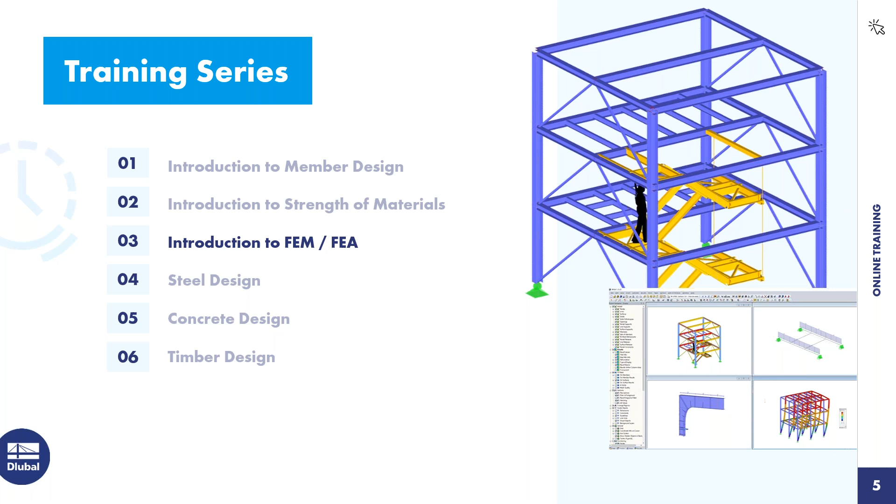So what can you expect from today's training? First of all, we will give you an introduction to the basic principle of the finite element analysis. Then we will model together a kind of continuous slab; it will be our introductory example of today. Then we will give you an introduction to the plate theory, the basic different concepts between two plate theories, Kirchhoff and Reissner-Mindlin. Furthermore, we show you how to perform nonlinear calculations with RFEM 6, and then the final step will be some input of singularities, which we do also together.

So let's skip to the PowerPoint. First of all, we see here the basics of FEA. In general, computer programs are based on the displacement method, so the unknown values are deformation or displacements. It's the opposite of the force method, and both calculation and analysis methods you learn in general in your studies, college, and courses.

In the force method, the force is the unknown value, and you try to get the value of the forces. In this case, we have the displacement method, so the unknown values are the displacements and deformations. Based on these, the computer programs calculate these deformations and displacement vectors first, and then they can get to the results of internal forces and support reactions, for example.

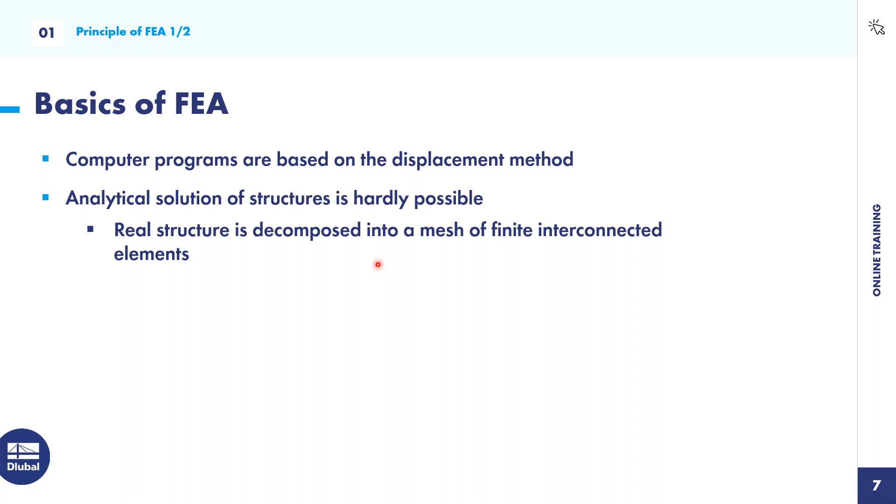So what will be done in this whole finite element analysis? The real structure is decomposed into a mesh of finite interconnected elements, and these elements, this is the finite element analysis. So we take the real structure and decompose it into a mesh of finite elements.

Then at each element, the properties are described at the nodes, so also with the degrees of freedom, and the mechanical behavior is described by different approximation sets. This is different for each software developer, and the whole process of decomposition of structures into finite elements is called discretization. This is one technical term you have to remember when dealing with finite element analysis.

Okay, so the next thing is the procedure of an FEA calculation. At first, we mesh the structure and determine the local element stiffness relation. So at each FE node, we get the local element stiffness, and then we have to transform it to the global coordinate system.

Furthermore, we have also a composition of the element stiffness relations, and through the transformation to the global coordinate system, we assemble the entire structure. Then we have the composition of the total stiffness relation, and now we have to add some boundary conditions, such as loads and supports.

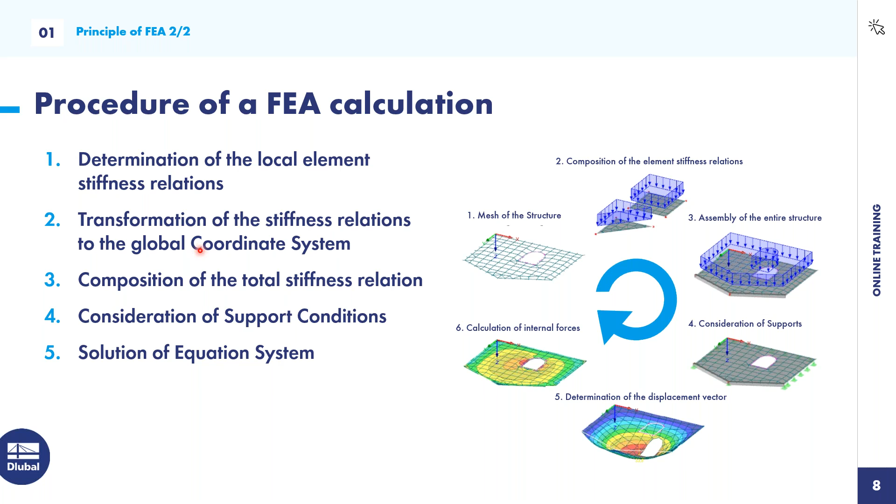So we have to consider these support conditions, and then we solve the whole equation system, and the first thing we get is the displacement vector. Based on the displacement vector, we can also calculate the internal forces and support forces. Yeah, and this is the basic principle of the FEA calculation.

You don't need to know more because I'm not a teacher or professor who teaches courses about FEM. In my opinion, this is enough to know how programs like RFEM 6 work in general.

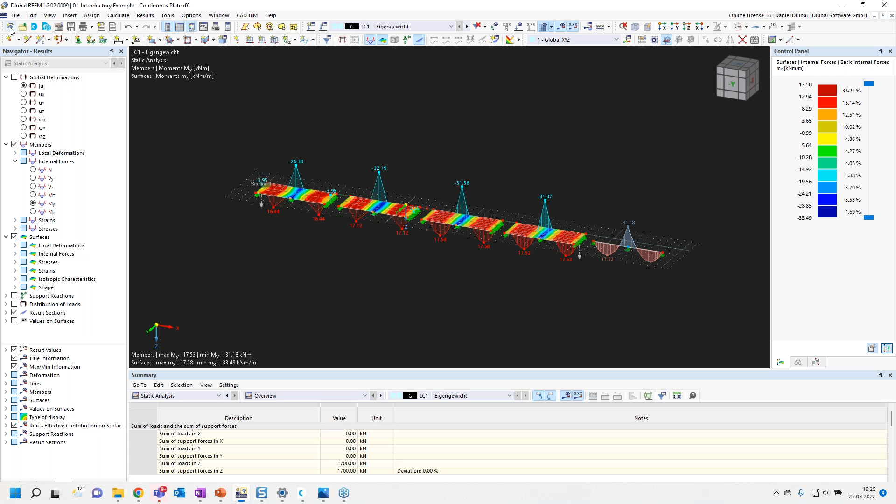Okay, so a new window is appearing. I will close this. A new window is appearing, and we enter here the name continuous plate, and I choose here the type of model 2D XY plate. And this is everything. You can save it also under project, but in this case I don't need it, so this is absolutely fine.

Important is that we choose here the type of model 2D XY plate, because we want to consider bending moments into 2 different rotations and also 1 vertical deformation. So I click on OK.

We already had one training about the introduction of member design, where I showed you a lot of the user interface of RFEM 6. This is something I won't do today, but I'll give you a rough overview about RFEM 6.

Here you find the menu bar at the top. An important thing is that you can also change your background. Go to display properties, and at the bottom you find default settings. I prefer the white background, I'm a big fan of it, so I click OK, click OK again, and then I see it like here.

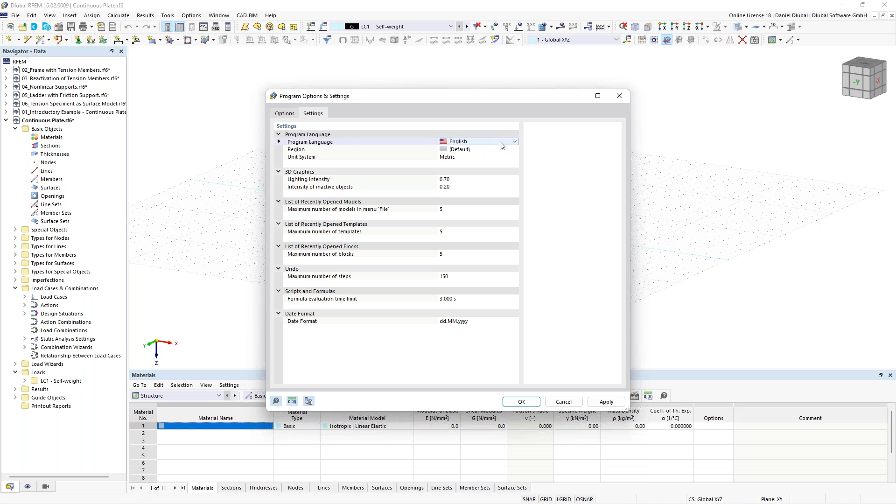Because it's a kind of international training today, I will also show you how to change the language. Go to the menu bar, options, click on program options, and in the tab settings you can change the program language into different languages. Then you have to restart the program and the language settings will be applied.

Okay, good, let's model together. At first I will create the surface. I click on new rectangular surface, and now I have to create a thickness with a material.

So what is a thickness? A thickness of a slab or wall is pretty clear - every surface has a thickness, and you can compare it with the cross-section of a member. Last time we created new members, and the members had information about the material, and this material was assigned to a cross-section. This cross-section is an adequate example for the thickness.

So we create a new thickness, and this thickness will be 300 millimeters thick. We will also create a new material, so I open the material library.

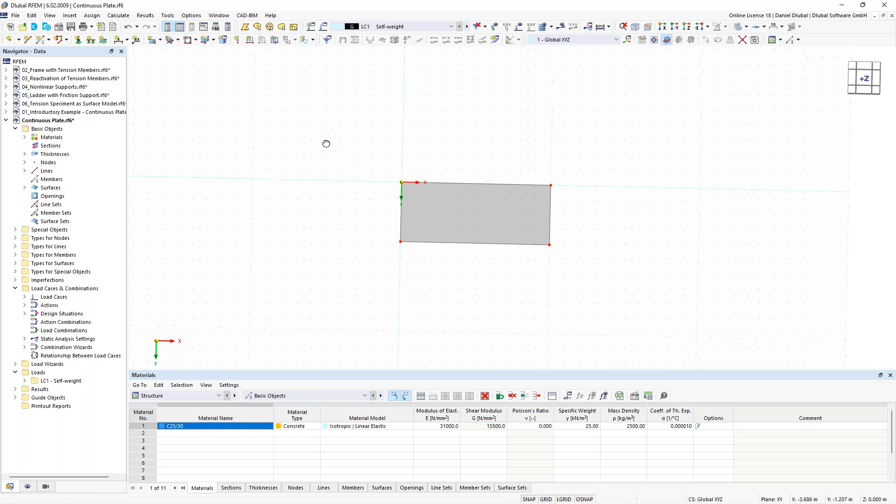Now I start from the global 0 point, click on this grid point, and go 10 meters in the global X direction and 4 meters to the bottom. This is the end coordinate. I click OK, and a right click or escape will end this command.

So the next part is the creation of an additional line here in the middle, because we want to consider a continuous beam or continuous plate. In order to assign some line supports, I have to add an additional line. We can do this very easily.

Just go to the symbol bar, click on new line, and choose the middle point of this line and connect these to one. In this case, I have here blue nodes.

What does it mean, these blue nodes? These blue nodes have the type 'on line', so they are part of this line. When I double click on this outer line, number 2, I also see which nodes are on this line, and now I also see node number 5. So everything in RFEM 6 is pretty clear, connected with a logical behavior.

When I want to assign an object additional information, you see it also here in the data navigator.

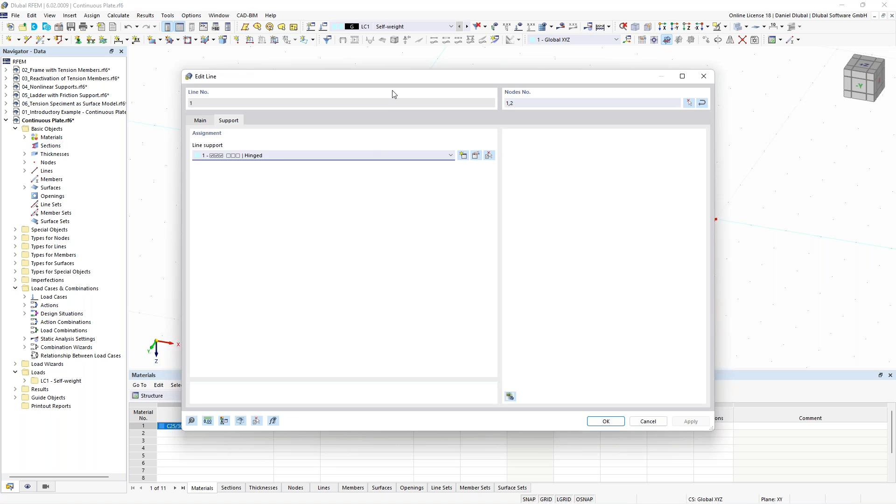You see that the line can have additional information, and when I click on the line support, you also see to which... sorry, this was the wrong one.

And here you can see, when I take a closer look to this line, which line this line support is assigned to. This makes it pretty easy because RFEM 6 has a clear structure of all the objects which can be connected to each other.

So the other one we'll do a little bit different. I draw a selection window in order to select both of these lines. Then I click on Assign Line Support, and RFEM 6 remembers my selection, and I create now a new line support.

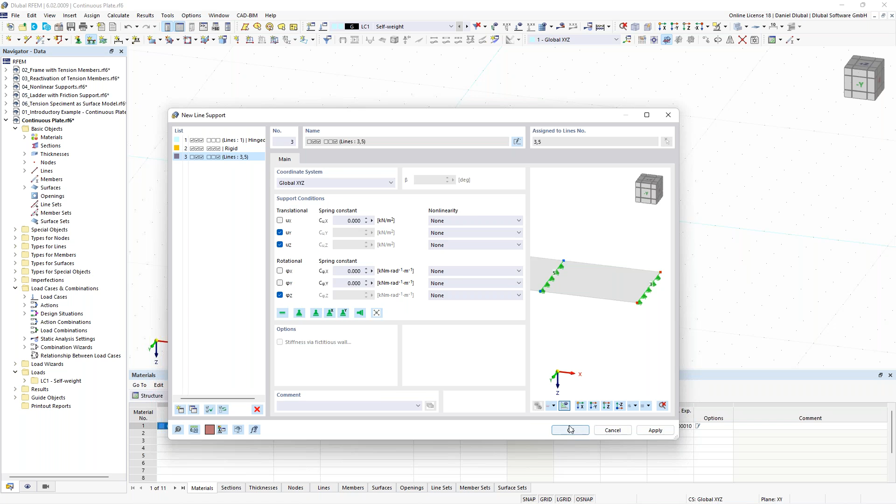In this case I only want to consider vertical forces, so it can be free in the global X direction. So I activate this sliding in X, or a roller support in X direction, and that was everything. I click on OK, and I see it like that.

So now I want to consider a surface load. In this case, we have to assign the loads to a load case.

The load case can be found here in the symbol bar. I click here on this button, and I don't want to consider the self-weight for this case, so I deactivate it and click on OK again.

The next thing is the creation of the surface load. So I go here to the symbol bar again and click on new surface load. As a load we have here 10 kilonewton per square meter, and I assign it to that surface. I click on OK and OK again.

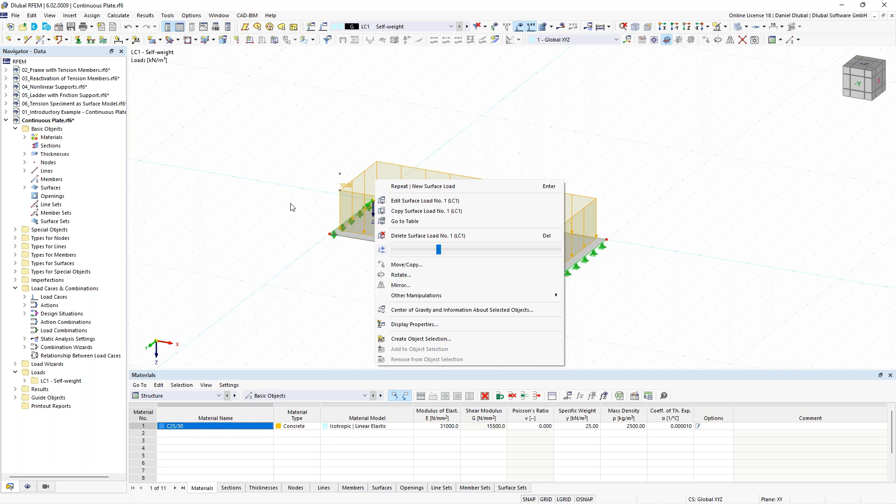By right-clicking on the surface, I can also adjust the display, so the display height of this surface load. And now it becomes interesting because we want to add different FE mesh refinements.

So in general, the whole FE mesh size is set here in the menu bar by clicking on Calculate and Mesh Settings. Here we see a target length of the finite elements. If I don't do any further FE mesh refinements, RFEM 6 will generate the FE mesh by this length.

But in this case, we want to do our own refinements. For a better overview, I deactivate the display of the loads and I go to the data navigator, and go here to types for members. Sorry, not members, types for surfaces.

And here I have the option to create mesh refinements for surfaces. Right click on that and click here on new surface mesh refinement. Now a new dialog opens and I can create different kinds of mesh refinements because I have here this list, and then I can assign it to different surfaces.

So I copy this one 3 times, and the first mesh refinement will be 2 meters, the second one 1.6, the third one 0.5, and the last one 0.1. Okay, I click on OK.

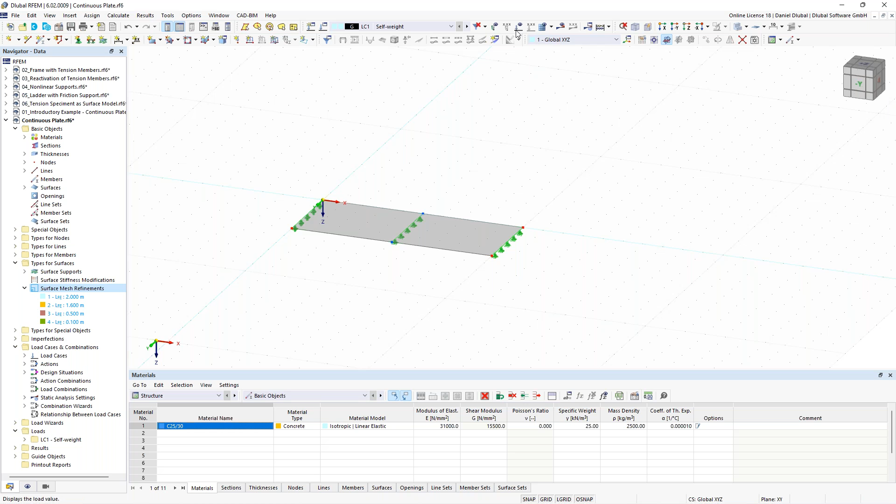So I activate here the load again, and now I copy the whole structure in order to make 3 more surfaces. So I select the whole structure here. Now right click on the structure, and now I want to move and copy it.

I say create copy 3 times, and the displacement vector is from here to here. I can also insert here a number, but 11 meters is okay for me. I say OK, and the surfaces were copied.

I move them a little bit so that we have more place here. So I move them in order to have more place here.

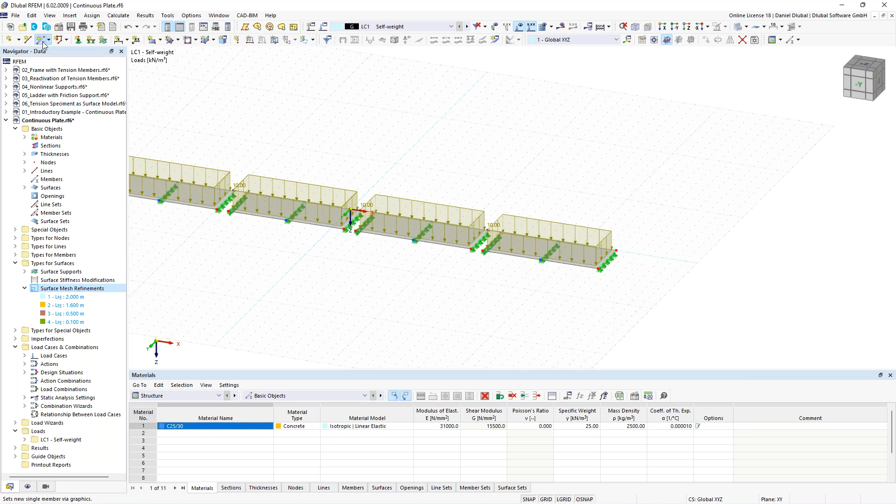Now I will add as a reference example also the beam element. So I click here on new single member in the symbol bar. And again, here we have the member type beam, and we have to assign them a section.

So I create a new section. In this case, a rectangular, massive rectangle section. I go here to the parametric massive, and the geometry is here - the width is 1000 millimeters and the height 300 millimeters.

So if someone doesn't see this rectangular massive profile, you can also import different sections from the cross-section library. Just click here on massive rectangle and then you have the same thing. Okay, I click on OK.

And the material of the section is the same one as for the surface. This is important. Okay, this was everything.

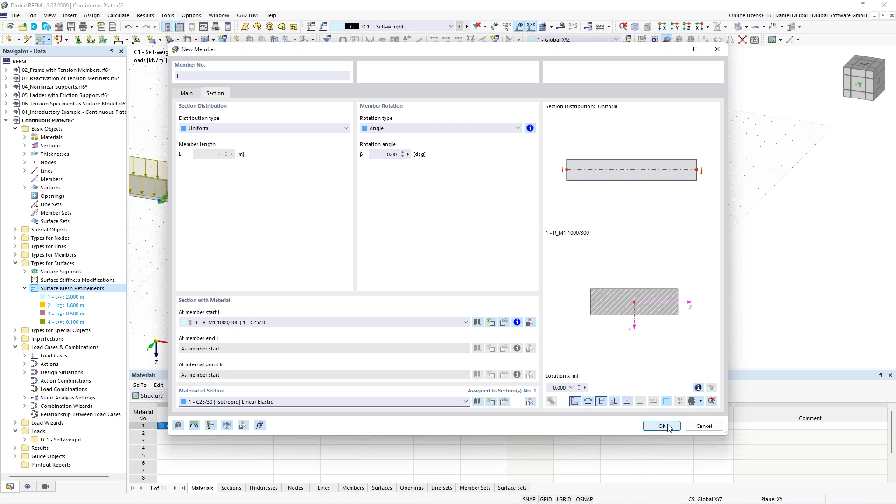Now I create also the beam from there to there. Now I don't see my grid points. No, this doesn't matter. I can also enter here in the left dialog the member length to 10 meters. I click on OK and I see it like here.

So in order to adjust the work plane, I recommend clicking with the right click to work plane grid and then say okay, I want to change the grid points dynamically according to the size of the model. I activate this, I click on OK, and now you see it like that.

Okay, perfect. So the next point is the assigning of these different mesh refinements to the surfaces. So I disable the view of the loads. And now this is one of the huge advantages of RFEM 6.

I go here to the mesh refinements. I click here on edit. And now I can assign these items in the list to the surfaces, and I can remain in this window. So I click on this first one, choose this one, click OK, say apply, and then I jump to the other one and do this for the second one and also for the other ones.

So last one, I click on OK. Yeah, okay. The next thing is that we generate the FE mesh.

So in order to generate the FE mesh, we can click here in the symbol bar, generate mesh or display mesh, doesn't matter. When the mesh wasn't generated, clicking display mesh generates it automatically. So I click here on generate mesh.

And in order to see the mesh a little bit better, I click here in the symbol bar to the wireframe model, the display model. And now let's take a look at the FE mesh. Yeah, this is the FE mesh, and at each FE node there will be results. Between these FE nodes, the results will be interpolated in order to get a smoother result distribution.

As you can see here, because we have a very rough FE mesh, this quality is not so good. So I will expect that these results will not be so good. So let's take a different look here. Okay, this is quite regular here, and this is very fine. So yeah, okay.

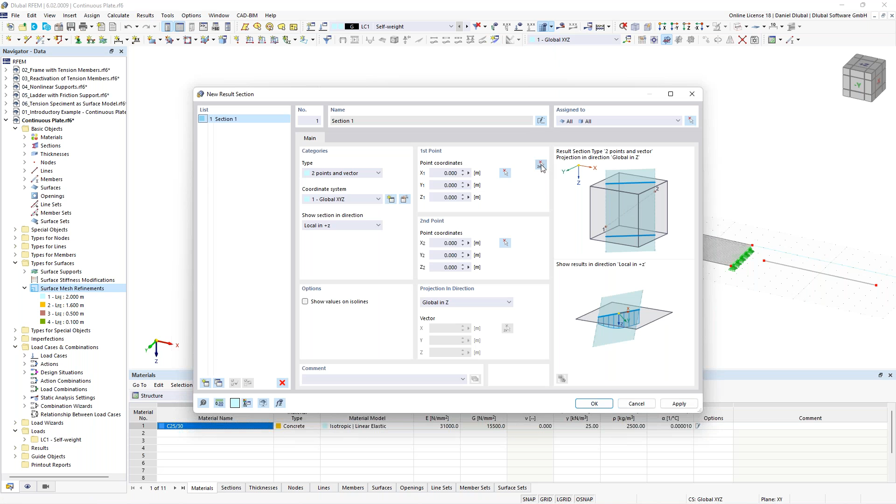In order to evaluate the results with a good overview, I will create a result section. Here in the symbol bar, I find the option to create a new result section. I click on that and I pick these two points where I want to have this section. In this case, this is from the left side to the right side. I click OK, and we see here this section.

Okay, yeah, and this was everything. Now let's calculate, and I'm very curious about the results.

Yeah, we got some errors, and this is because I forgot to assign some nodal supports here at the beam. No problem. I have to divide this beam into two parts because I want to have here a similar structural behavior as this surface.

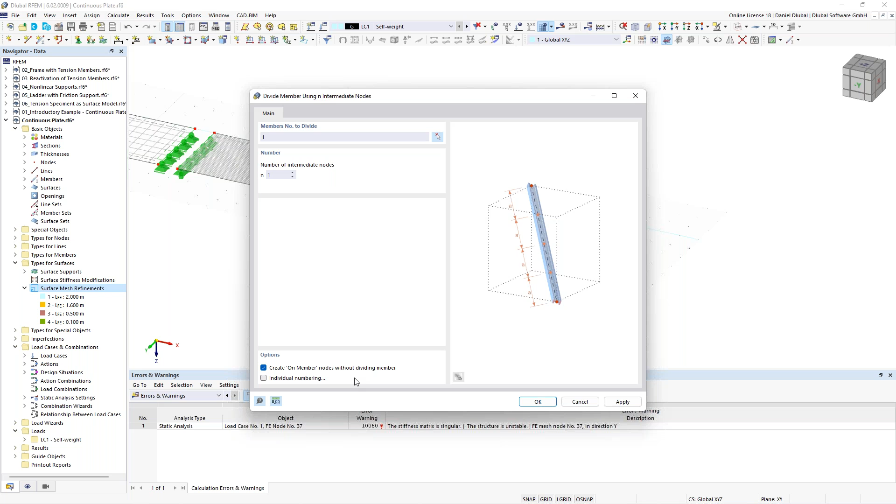So right click on the member and click here divide member, and choose intermediate nodes because I want to divide it in the middle. So I choose here 1, and now I create the option that the member shouldn't be completely divided, just creating this node. I click on OK. I say yes.

Now I have to add the line supports. The same thing we did with the assigning of the mesh refinements, we do also with the nodal support. So I go here, assign nodal support, and for my left node, I have to adjust my nodal support a little bit.

Because in order to also carry rotational moments, I have to consider the phi x rotation, and also that this member can't rotate around its own axis. I click on OK. I click on OK.

And now I assign it to this node. I click OK and then apply again. And now I choose here this roller in X and choose the other nodes and click on OK.

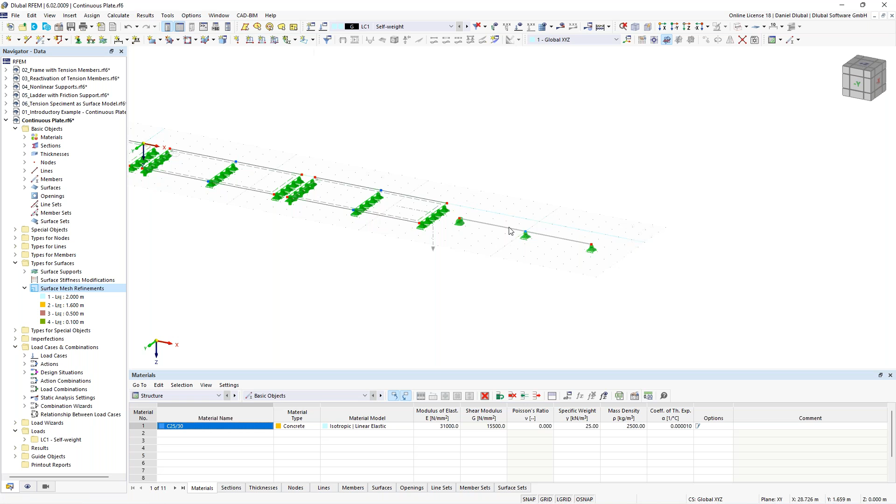Okay, now I have to apply the load. In this case, I have to apply a member load. We have also line loads. Where's the difference? Member loads are applied on real members like this one, and line loads, they can be applied on surfaces.

So this surface, for example, has boundary lines. When I want to apply line loads on the surface, I have to use line loads. And when I want to apply members like a steel hall with real steel cross sections, then I have to use member loads.

Okay, so I click here on member load, choose here a magnitude of 10 kilonewton per meter, click on OK, choose this one, OK again, and we have this load. Okay, now I try to calculate it again.

Now I hope it works. Okay, seems pretty good, and we get the result.

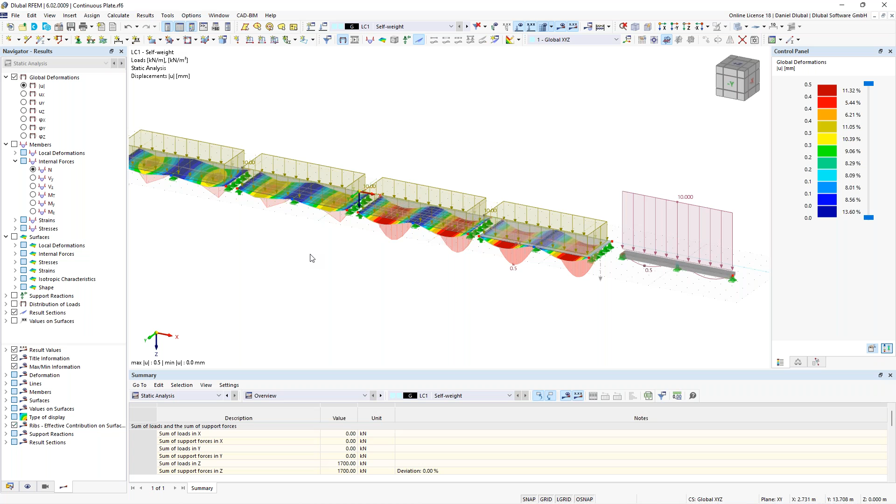So at first, we take a look at the global deformation. This is one of the first plausibility checks when you are performing FEA calculations, that you take a closer look to the deformations at first. So I deactivate the result section and take only a short look at the deformation. I see here, okay, yeah, it seems quite correct. Also here, this one seems quite okay. Maybe I change this one a little bit. And yeah, okay, so it seems correct.

Now it becomes very important. The next thing is the evaluation of internal forces. And therefore, I choose these two ones. I select them and create a visibility. And I disable the view of the loads because I want to show you something, and this is pretty important that you understand that.

So for members, in order to see results, you can activate internal forces by choosing them here in the result navigator. Now you see the internal forces, so the distribution of the bending moment. When I activate the local axis of this member, it means the moment goes around the local y-axis. Remember this for members or beams.

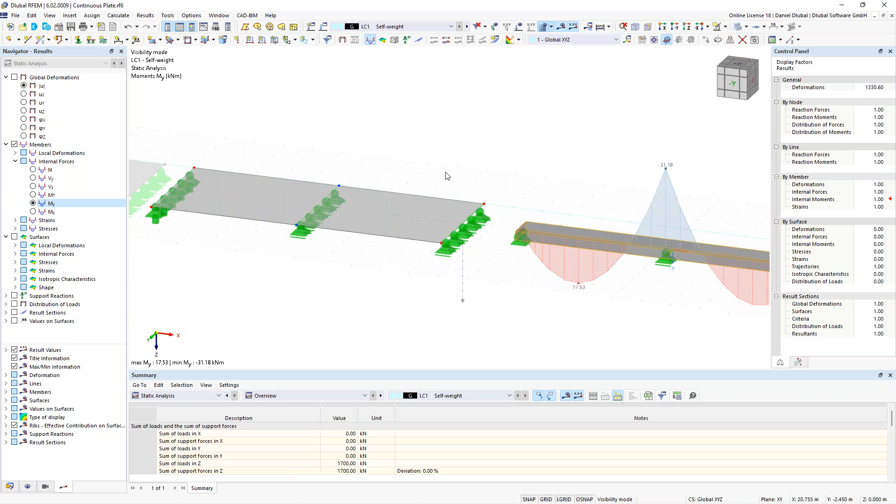So at surfaces, we have it a little bit different. I activate the surfaces, also here internal forces, mx. So mx is the same or comparable with the my of beams. When I activate the local axis of the surface, at surfaces the internal forces go along the axis. So mx means I get the internal forces, in this case the bending moment, along the x-axis, and not around the y-axis. So this is a huge difference.

So in order to see also the shear force distribution, I have to activate this one and here also this one. Then we have here the same distribution. Okay, so this is important to remember.

When I take a closer look at the internal forces of surfaces, I have to see mx as the my of beams, because mx is along the local x direction of the surface.

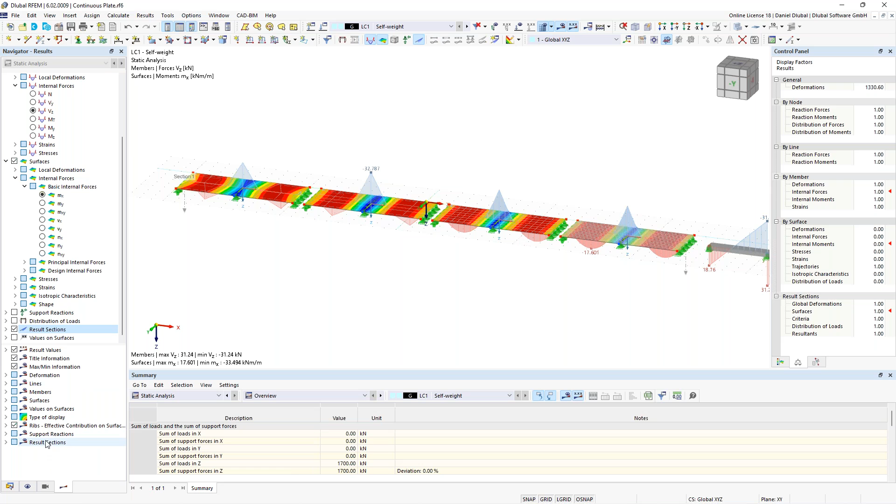Okay, now I change the hiding of the visibilities, and now we go through the examples. In order to have a similar distribution of the result section here on the right side, I activate the result sections. So the next thing is that I go to the bottom part of the result navigator and I activate local extremes of the result section.

So what can I see? First of all, let's take a closer look at the bending moment. So I choose this one. This beam should be our reference example. And these surfaces should have similar values like this beam here. So let's take a closer look.

So here we can see, okay, we have a support moment of minus 26 kilonewton meters, and here of minus 32, minus 31, minus 31. Okay, yeah, this seems pretty interesting because through the bad mesh refinement here, because we are very rough here, only 2 to 2 meters, we get very bad examples because only at these FE nodes the values are calculated, and the finer we get, the more we get to the same result like here at the beam element.

So also here at the field moments, 16, 17, and here we have 17.53. So this is also a difference. So in order to summarize it, it is important for FE calculations that you choose the FE mesh as fine as necessary and as rough as possible.

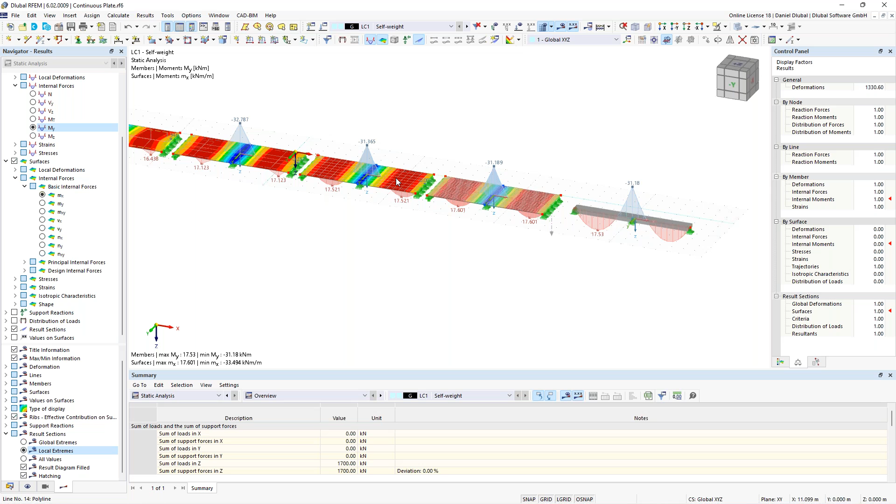For example, here you can see when I deactivate the results, that we have here more than 4 up to 6 FE elements between one span. So this leads to good values for results.

So my recommendation is between two boundary conditions, I would say you should have at least 3 up to 4 or 6 finite elements, because then it is enough and sufficient for your FE calculation. So again, choose your FE mesh refinement as fine as necessary and as rough as possible.

So now let's take a closer look at the results again. Here, right click on the section. I can open this and open a kind of result diagram.

And here I can see this in a better comparison. So here you can see I have here -26 on the left side. The next one is -32 and so on. This makes it quite interesting because the rough FE mesh is not good for this calculation.

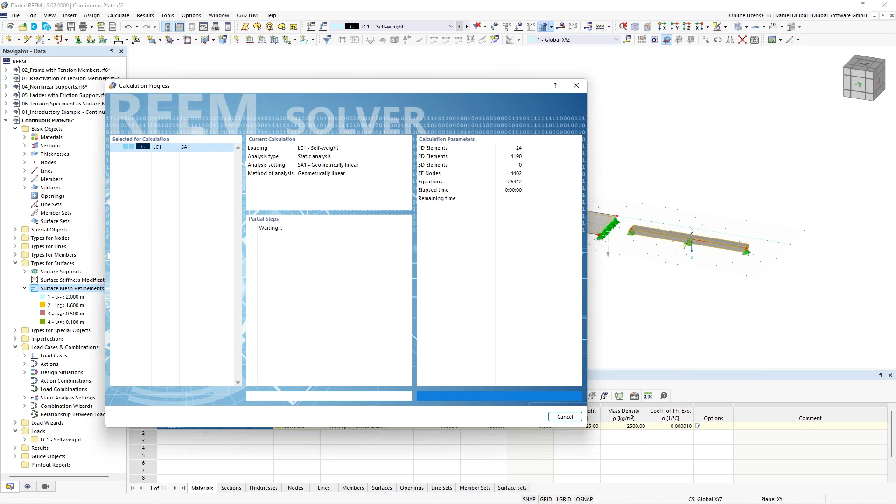And now you see how the support moment, for example, will change into that value. What would you get when you do the hand calculation? Yes, here, minus 31.25. And this is also the QL to the number of 2 divided by 8. This would be the maximum support moment of a distributed line or member load.

Okay, perfect. So much to this introductory example. Before we go to the questions, I have prepared 2 polls for you. Why I say please answer this one.

Okay, perfect. I will share the results. And yes, the most of you have chosen the right result. So what do I mean by discretization is the decomposition of the structure into finite elements. Perfect. So next question.

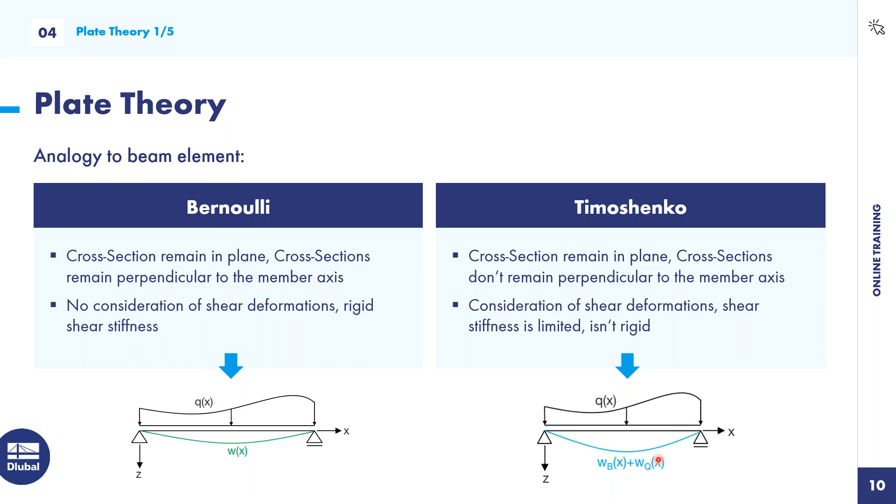So maybe here a nice example on the left side, the Bernoulli beam. It remains perpendicular to the member axis, and here at the Timoshenko beam not. Here we get an additional shear deformation angle, and this causes also more deformation through the shear activation.

Okay, now let's transfer to the plate elements. So the similar part of the Bernoulli beam is the Kirchhoff theory, and the same for Timoshenko, the Reissner-Mindlin theory. So also here some assumptions: geometrical linear solution, so we take only small deformation, the same also for the Reissner-Mindlin, also Hooke's law, cross-section remain flat, no warping, constant thickness.

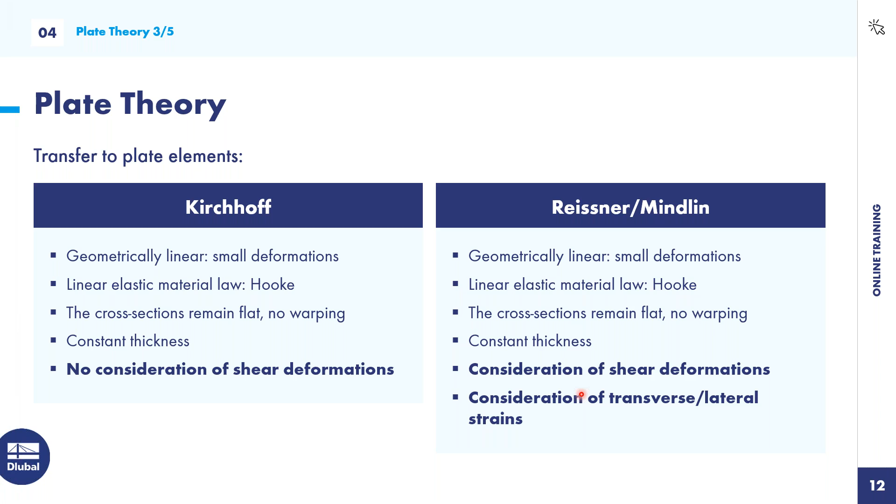But Kirchhoff has no consideration of shear deformations, and the Reissner-Mindlin, there we consider shear deformation, and also transverse or lateral strains. So we have this Poisson's ratio, what we set in the former example to 0, and now I explain you also the meaning of the behavior of this Poisson's ratio. So when I pull a beam, then normally depending on the material and also the Poisson's ratio, it becomes smaller in the section. Yeah, and these effects are also taken into account by the Reissner-Mindlin theory.

So let's transfer to the plate elements again. Kirchhoff on the left side, Reissner-Mindlin on the right side. So in structural analysis programs, surfaces can be calculated according to the bending theories, and we have the bending theory Kirchhoff and Reissner-Mindlin. In the calculation, according to Mindlin, shear force deformations are included, and according to Kirchhoff, they are not taken into account. So we consider no shear deformation.

Therefore, it is only good for thin plates. So it's recommended for surfaces that are relatively thin, such as metal sheets in steel construction. We only consider also a pure bending load bearing capacity, and this is also a simplified approach.

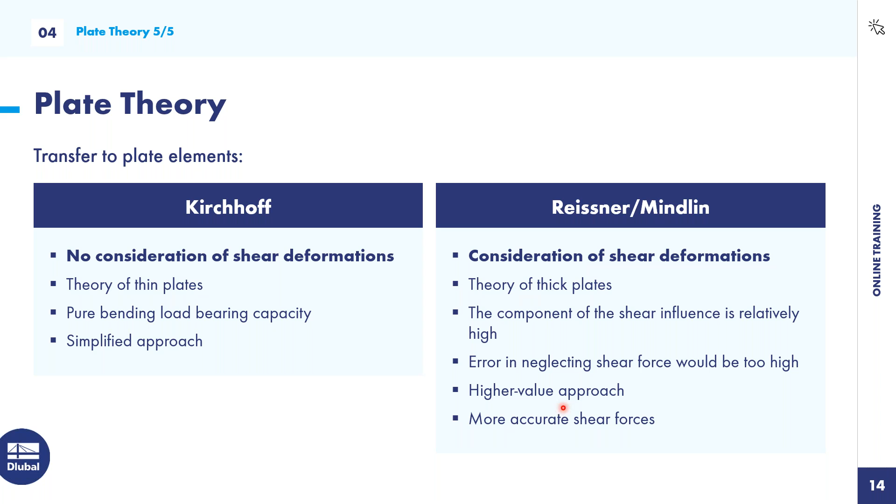So the other thing, Reissner-Mindlin, this can also be used for the calculation of thick plates, and the component of the shear influence is relatively high, so it would cause an error when we would neglect the shear force, and therefore we get also more accurate shear forces. And this theory works also with a higher value approach.

So this is the difference between Kirchhoff and Reissner-Mindlin. And now I show you where you find this option in RFEM 6.

So you go here to the data navigator, and here you find the static analysis settings. And when I go here to the geometrical linear setting, I edit this. And here in the tab basic settings, I find these two plate bending theories. And now remember a little bit the results, and when I change here to Kirchhoff, you will see here different results.

Yeah, so different results because we are having now some thin plates, I would say. The results are quite similar, but you can imagine when we have really thick plates, like some bottom plates or foundation plates, then the results can be different. And when we also take a closer look to the shear forces, then we see also a kind of difference. Okay, so much to the plate theory.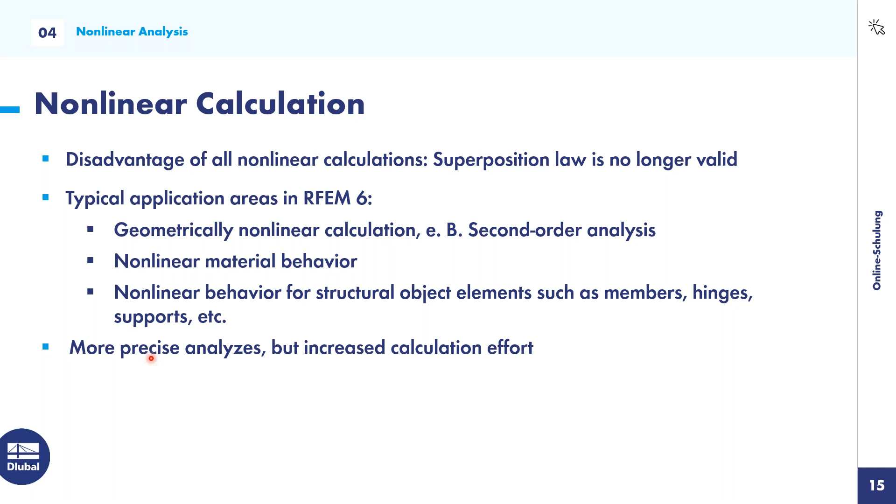Now I have prepared some examples for you, just for seeing and understanding these different nonlinear effects. So I go here to window. What I have here as a first example is a frame with tension members, part of a complete steel hall. We have this one side, and you can imagine there are also beams for the roof, but in this case we only consider this one side, so I have to stabilize it by giving it a kind of bracing, and we see here these bracings.

So what happens when I don't have these bracings? I delete them to show you what happens. Yes, we will delete them like that. So let's calculate it.

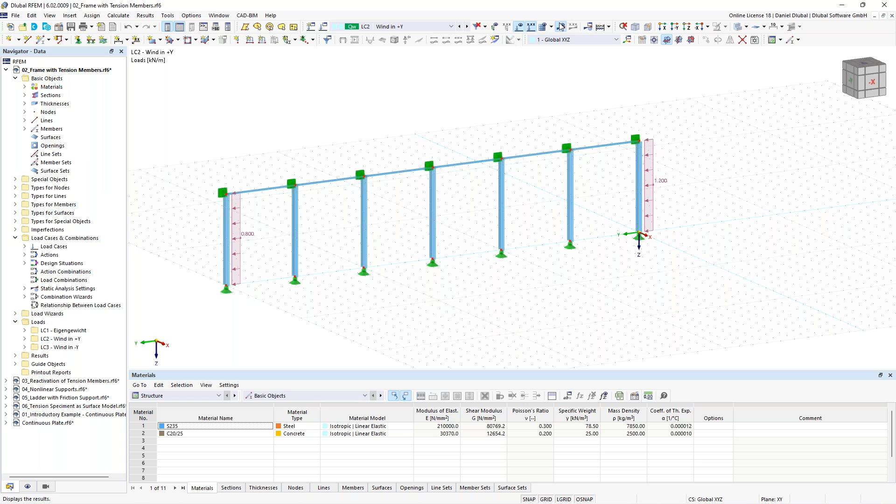We get some wind loads, and when you see the boundary conditions, the supports are supporting the structure for the Z direction and the X direction, but not for the Y direction. So what happens? Let's calculate it. You get an error because of an instability. In the FE calculations, they check the stiffness matrices, and when they are singular, it can also mean the structure is unstable. So it writes this warning: FE mesh node in direction Y, so it doesn't work.

So how can we avoid that, or make this structure stable, by adding some bracings? I go to new single member, and here I have the possibility of giving this member a type, truss, only normal forces.

This member type, as we already learned in the first online training, carries only normal forces. It doesn't matter if they are compression forces or tension forces, only normal forces. No bending is activated here.

But now we give them an additional condition, so we check this nonlinearity option. I go to the nonlinearity tab and choose failure if compression. Let me take a closer look at that. We have different nonlinearities for members: tension, compression, slippage, tearing, yielding, and so on.

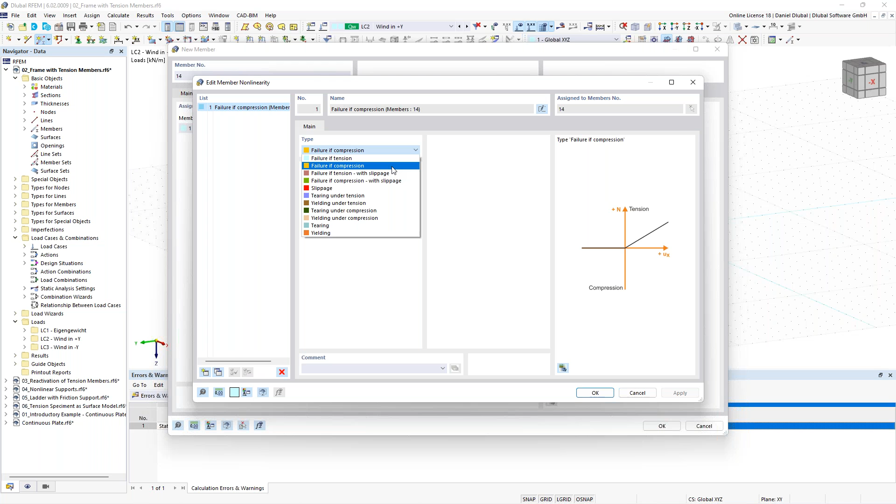For this easy example, we want to consider these members because they are bracings. They normally only consider tension forces, so they don't carry any compression loads, they fail if they get compression. This is also the reason why I have a bracing where I consider the tension rod from one side and also from the other side, because the wind can blow from both sides. This is why I select failure if compression.

I click OK, and add them from there to there. I say yes, and also from there to there. Now I have to change the cross-section of these members because they are quite huge. For that, I have another cross-section, a round rod.

And now I can also copy that by drag and drop. So, by drag and drop. And now I calculate the structure again.

And it is stable. Perfect. This is what I wanted to have. I changed the view into the opposite of the X direction. Now I can see it like here.

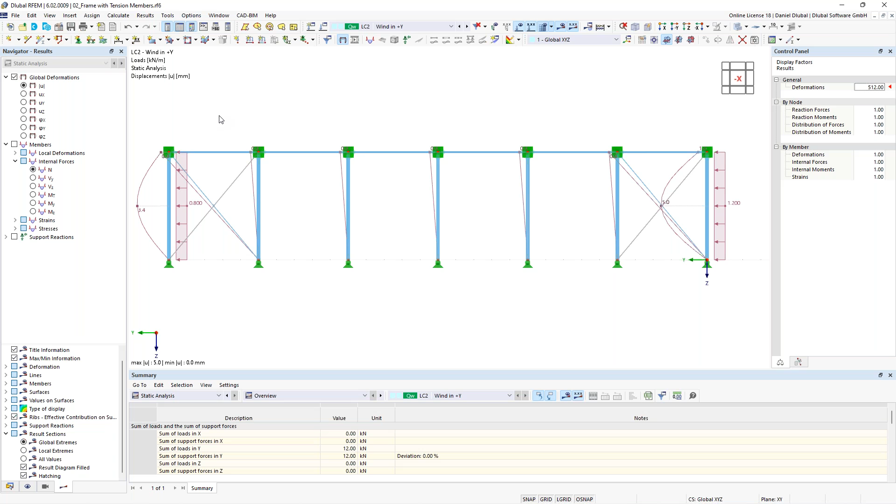When you take a closer look at the deformation, you see we get the wind pressure, so it is clear that this member gets longer, as well as this one. But when I take this one from the other side, the other side of my bracing gets longer. This is the reason why I have this cross bracing.

Okay, so much for that. We can also make an alternative of these nonlinearities of members. I select them both again, and instead of giving them a nonlinearity and deactivating it, I can also give them the member type tension, and it will have the same effect. I click OK, calculate the structure again, and it has the same effect.

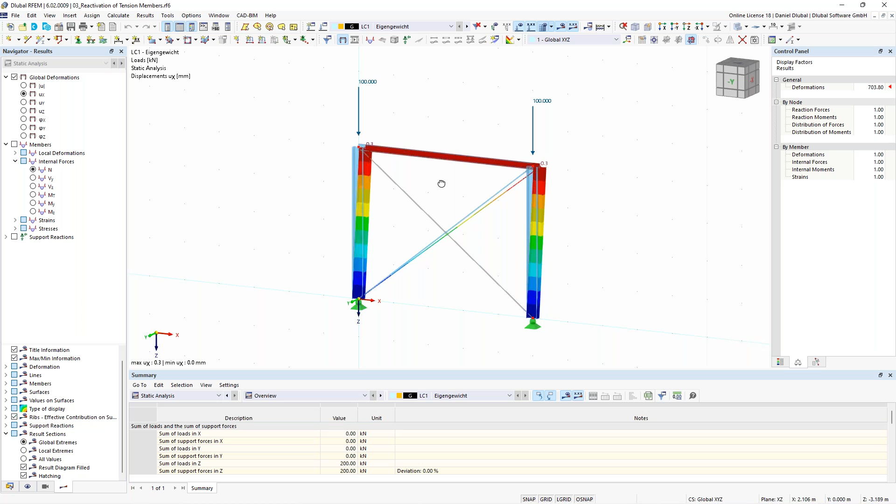So just an example of this one. Okay, so we have here this frame with these boundary conditions, and the upper beam is a truss. So a truss means that this beam has hinges on both ends, and without the bracing it would get unstable.

We can test it when I delete this and calculate this. It has no stiffening into the global X direction. You see it here. So we have to add this bracing back.

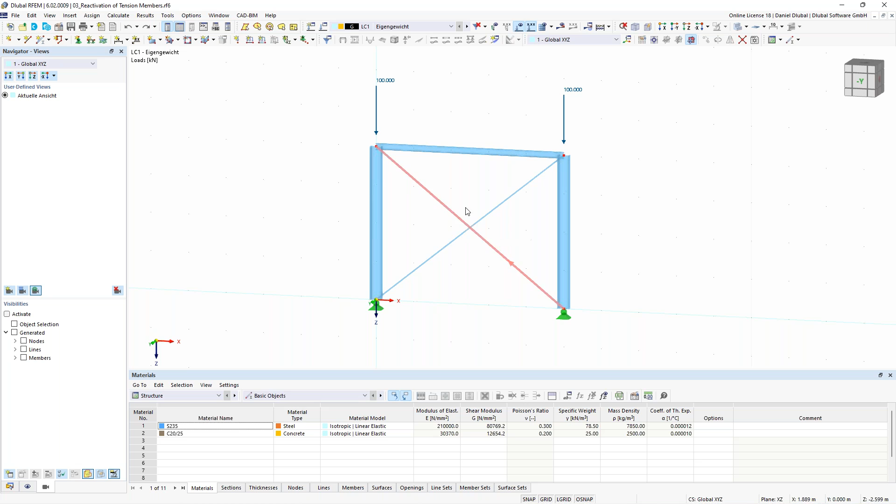But what we also have to consider is that when I take a closer look at the deformation of the structure, the columns will get compression forces and will also get shorter, but also in the first iteration process or calculation, both bracings, both tension rods, get compression, and they would fail. So I calculate it, and let's see what happens.

And you can see here we get a structure that is unstable. And now we are wondering why, because normally it is stiff, but we get here compression forces in the first iteration step.

So in order to avoid this, or to consider this, we can reactivate kind of nonlinear members or tension members. I go here to the data navigator, and this setting you can find in the static analysis settings. Go here to edit, and when you deal with nonlinear beam elements or members, you have here a third option of reactivation.

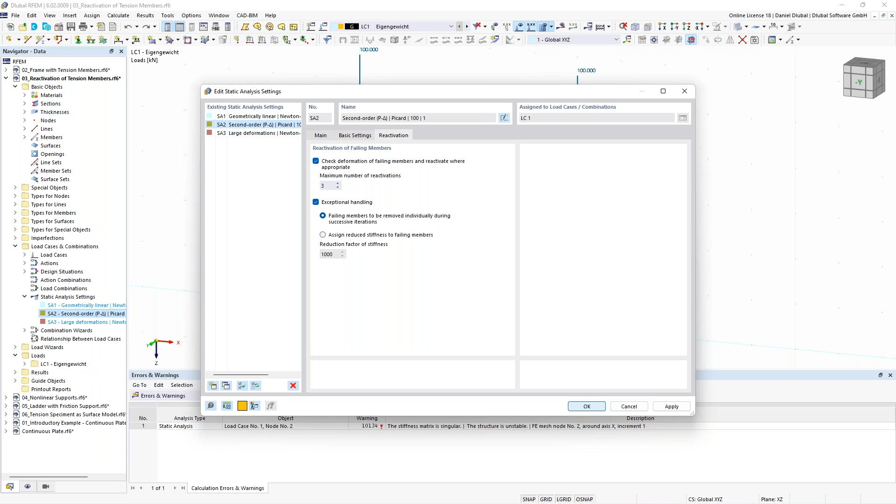When you accept this exceptional handling, you have two possibilities. I decide for this one, the first one, that failing members are to be removed individually during successive iterations. So what this means is that after the first iteration, RFEM does not remove, for example, all tension members with a compression force at once. At least some of these tension members will stay, and then the others are taken into account. The tension member with the greatest compressive force is removed again at each iteration step.

So let's activate this, calculate this, and see if it works. And yes, we see it works. This is the consideration of tension members. And when you get instabilities, although you have the structure well stiffened, then it can lay on this, maybe.

Okay, next example. Nonlinear support. I have here a pretty easy example. You can assign nonlinearities also to supports. So this support is here, this is the nonlinear support. And what do I have here? I added them, and here I have chosen...

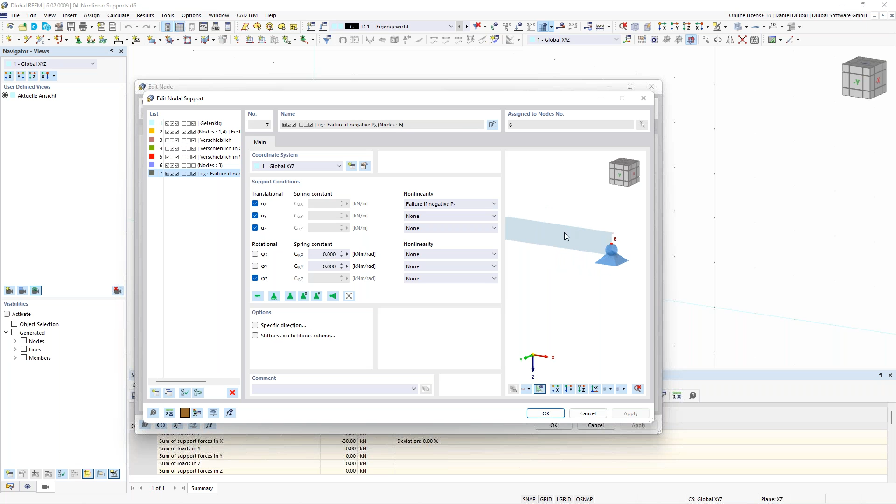the nonlinearity failure if negative px. So what does it mean? So when this support gets horizontal forces against the global x-axis, then this support fails. No support reaction will be carried. In other words, when I pull here a force, or have here a force against the global x-axis, then this support will fail.

Okay, and therefore we have here also this fixed hall frame, and here also we can imagine the deformation of this structure. Okay, next example.

We have here a ladder with friction support. So first of all, what did I do here is that I modeled, or created, loads on each of these steps. So I can show it to you. I start the animation. So each load case is one single load on one step of this ladder.

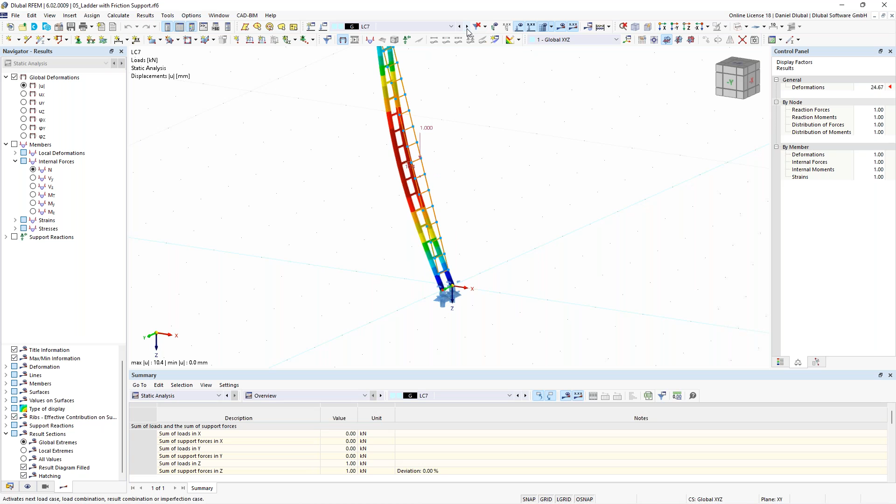What I wanted to consider here is at which step the ladder gets too much vertical load that it would slip in the X direction. So we can see here load case 1 works, 2, 3, 4, all these load cases work. But at load case 12, I guess, yeah, you see it slides in the X direction.

We get too much compression or vertical forces, and this is because we have here at the bottom 2 node supports which have a non-linearity. This is a really difficult word, I'm sorry. So let's take a look at this non-linearity.

I added this, and here I activated a kind of friction PZ. What does it mean? When I have activated here PZ for the translational support condition, UX, referring to my global coordinate system, it opens a new tab here - UX friction PZ. So what does it mean? I have here a friction coefficient of 0.2.

This would cause the maximum bearing capacity of my PX, of my horizontal support reaction. So 0.2 times the PZ, the vertical support reaction, equals this PX. So the PX, the horizontal support force, is always depending on the friction coefficient and the vertical loads or the vertical support reaction.

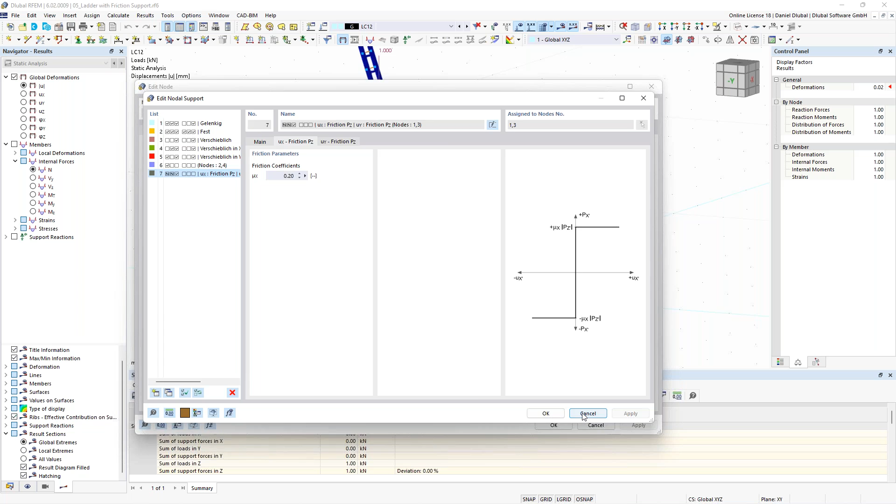Okay, so much to that.

The next example is also a pretty interesting one. So here we have the following situation: I want to consider here a kind of plastic analysis with RFEM. So we have here this specimen - something you maybe saw in a laboratory of materials when you did some experiments, and I did here the same thing.

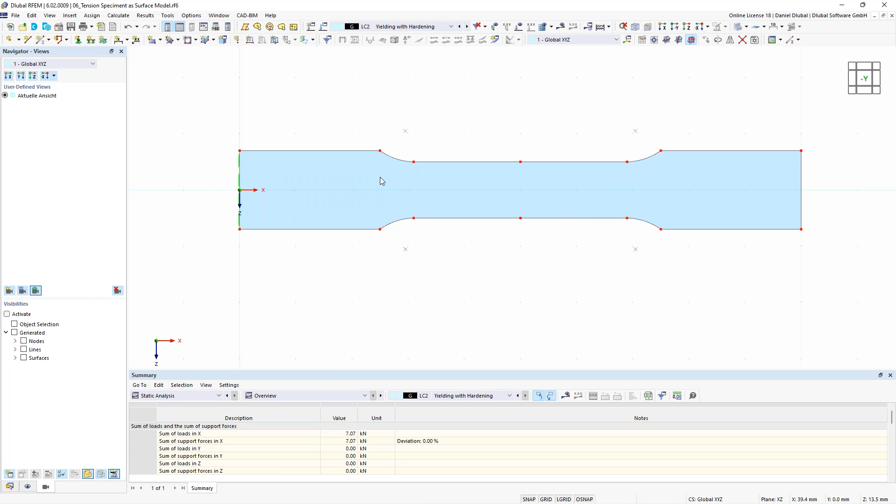To put it into a general concept: the elastic deformation of a structural component due to a load is based on Hooke's law. Hooke's law is a linear elastic stress-strain relation or behavior. I think this is pretty clear. In some examples, you want to take a deeper look at what happens if this linear elastic stress-strain relation is no longer current - what happens after this linear behavior, in this case, the plastic behavior.

We can consider these nonlinear material effects also with RFEM 6. So how do we do that? When we use RFEM, we have an add-on called, here in the base data, nonlinear material behavior. When I activate it, I can consider elastic plastic material behaviors. RFEM 6 activates for me, for materials, different material models.

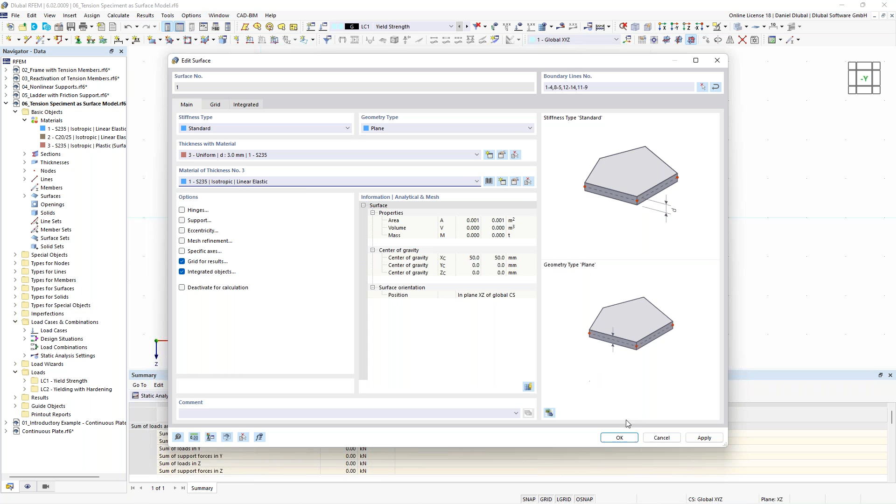So what do I do at first? At first, I want to calculate this surface with a linear material model. I have already created here some material models, so double click on this surface, and here I want to consider an isotropic linear elastic material behavior. I click OK, say yes, and the program should calculate it.

Then I take a closer look at the equivalent stresses according to von Mises. This is a kind of stress hypothesis, pretty well known and also widely used for these kinds of stress designs or stress proofs for steel sections or also for steel surfaces. So we have here this specimen example with a yield strength of 235 Newtons per square millimeter, and the tensile stress should be up to the yield strength. Maybe I'll show you also this tensile strength, this line load.

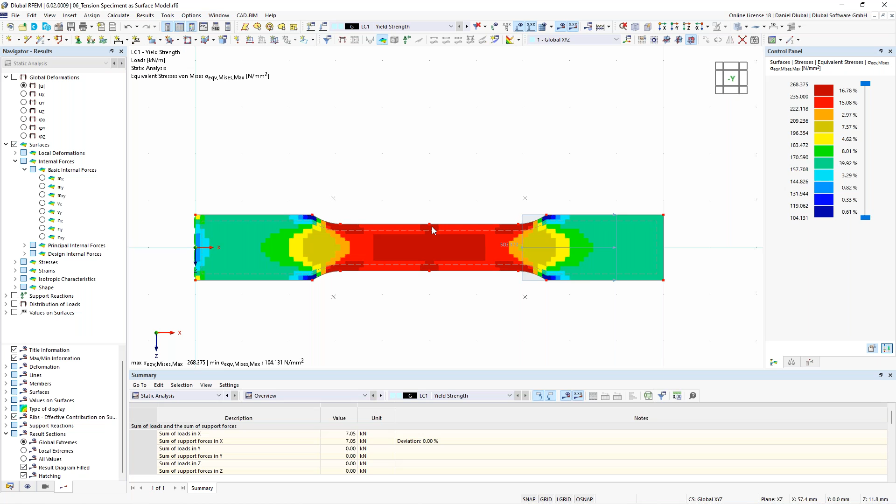And now we see here the following example, and we see here also areas which are higher than our yield strength of 235. How can I see it? I have here on the right side my control panel with different colors representing different areas of my stresses. Double click on that, I can also set here a limit, 235 - this is my yield strength. I say OK, and now I see all these dark red areas which are more than 235.

Normally this can't happen because steel is an isotropic material with a yield strength of 235, but we get stresses higher than 235. So to consider the real material as a nonlinear plastic material behavior, I have to activate the add-on nonlinear material behavior and also choose another material model.

This is something I do now. I go here to the materials, and I have to choose this plastic material model. Double click on this one, and I have to choose this one, plastic surfaces.

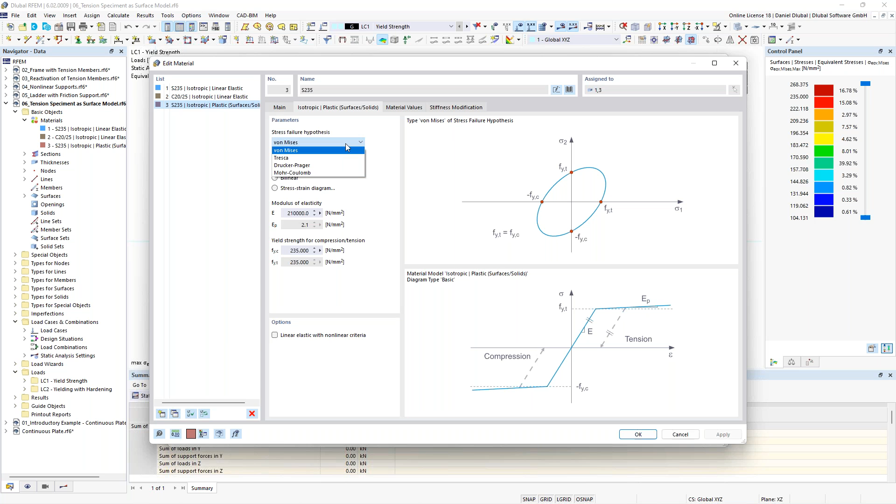When I add this, I can show you different material models. I choose this one, isotropic plastic for surfaces and solids. You have different tabs where you can adjust more information like the yield strength for compression or tension, so this is the maximum value of the calculation. Then I have the modulus of elasticity, and I want to consider the stress failure hypothesis according to von Mises.

I calculate all load cases, because the other load case is a line load at the end which is a little bit higher. But let's take a look at the first load case. Now it's pretty interesting when I change this one: the highest value of my stresses of von Mises is 235. So there's no higher value, and this is the right material behavior.

This is pretty interesting. Now you also see the places which are yielding. I can also show a kind of criteria, and these are also the locations which are yielding. So this shows me the degree of nonlinearity.

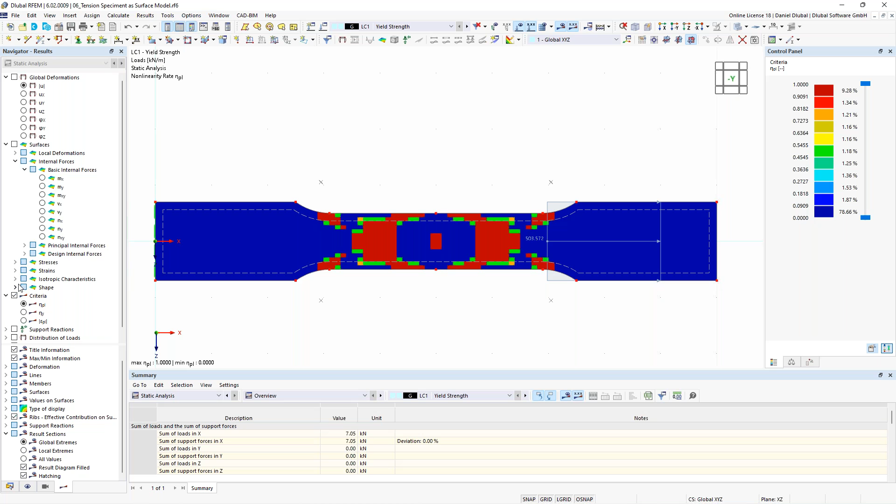Interesting. Now what happens when I increase the load at the end to 505,000 Newton per meter? So now we get higher stresses because...

When we take a closer look at the deformation, we see also the reduction of the deformation. So I activate the deformation at first. This was to the limit, in order to reach the yield strength of this steel surface.

Now we are over that, and we see the reduction of the deformation also here in the width. I can click on the deformation animation and I see it like that. It gets longer, I think this is pretty clear, but also in the width we see this reduction. These kind of material nonlinear effects you can also do with RFEM 6, pretty interesting for you when you are in this material laboratory and want to consider these kinds of things.

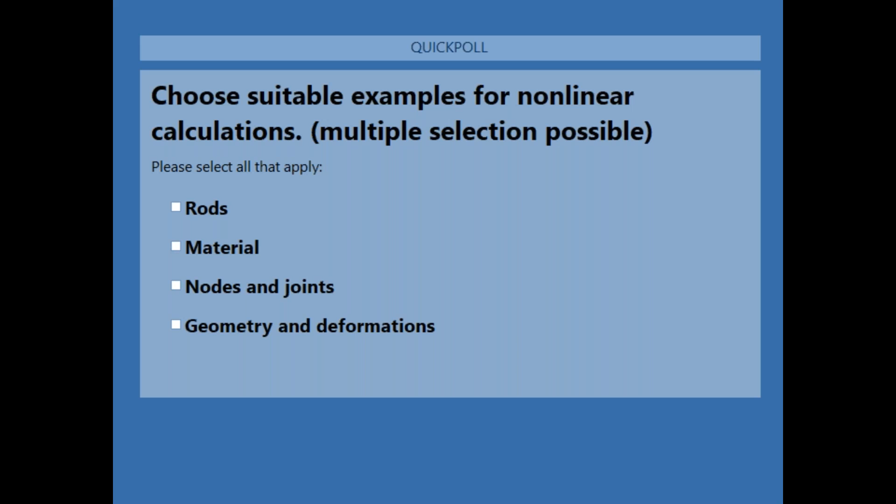Okay, most of you have voted. Let's share the results. So all 4 examples are correct. You can choose as nonlinear calculations: tension members or rods, so members, materials, nodes and joints, so hinges, and also when you consider the geometry and deformation according to the theory of second order, then this is also a nonlinear calculation.

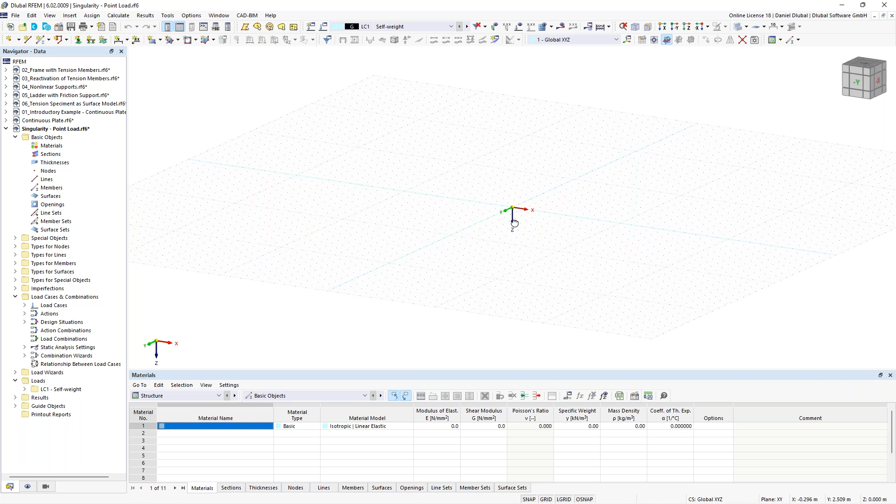I click on OK. The first example is also 4 surfaces next to each other with a length and width of 8 times 6 meters. So I create a new material, go to the material library, choose this one, and the thickness is 200 millimeters. I click OK, and again on OK.

Now I draw this surface. I go here to this direction, take a look to the global Z direction, 8 meters long, so X equals 8 and Y is 6 meters, like that. This was everything.

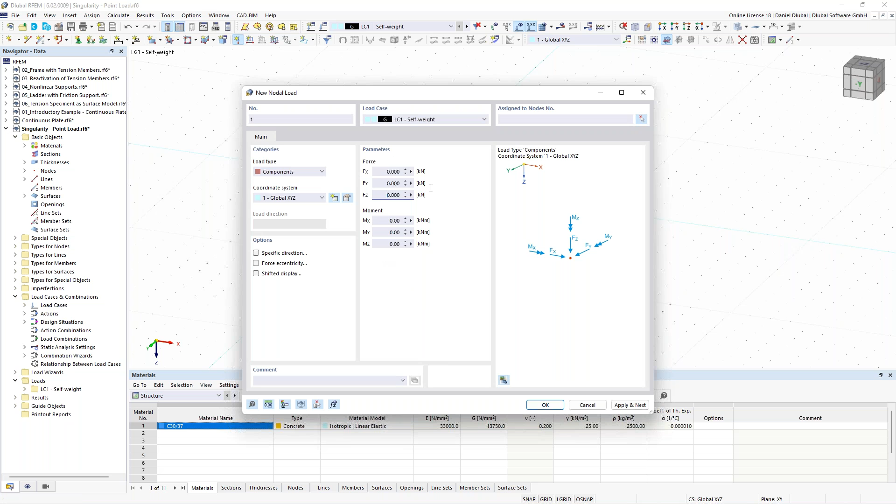Then I create a node in the middle of the surface. I go to the symbol bar, click on new node, click that one, right click. The next thing is giving this node a point load. I go to new node load, and in the Z direction I have 100 kilonewton. Assign it to that node. I click on OK, and OK again.

So the next thing is that we assign to the lines, line supports. I select all lines. It doesn't matter if I have also selected the node or the line load, the single load, because we assign line support to lines. Only lines are interesting for RFEM 6. And I give them this kind of value, the hinged line support.

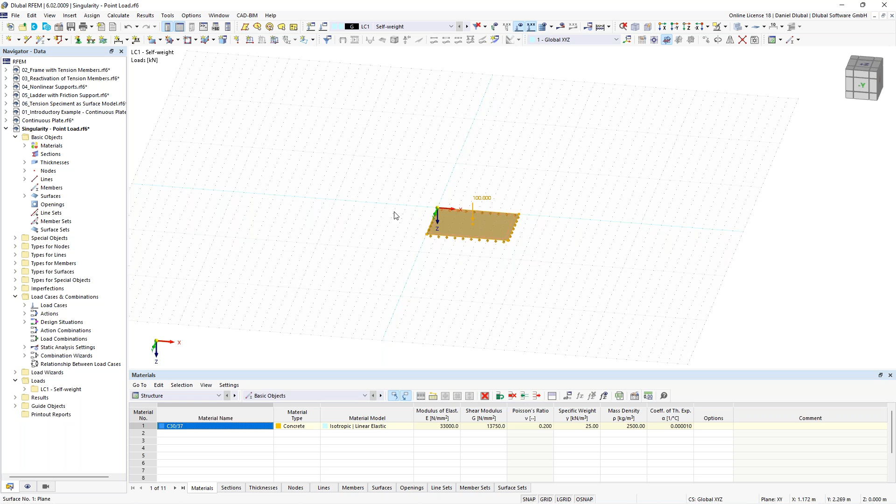The next thing is that we move it to this side and copy it from there to there, and from there to there, and again the same.

So the next part, we create types for surfaces, in this case surface mesh refinements. We assign this first one to be 2, 1, 0.5, and the other one 0.25. So now I created this surface mesh refinement with the help of the tables. This is sometimes faster when you do the input like that.

Simultaneously, these objects appear also here in the data navigator. So now I can, because I know the numbers of these surfaces, assign them very easily, because I know this is 1, this is 2, and so on. So I can do 1, 2, 3, 4, and now it's finished.

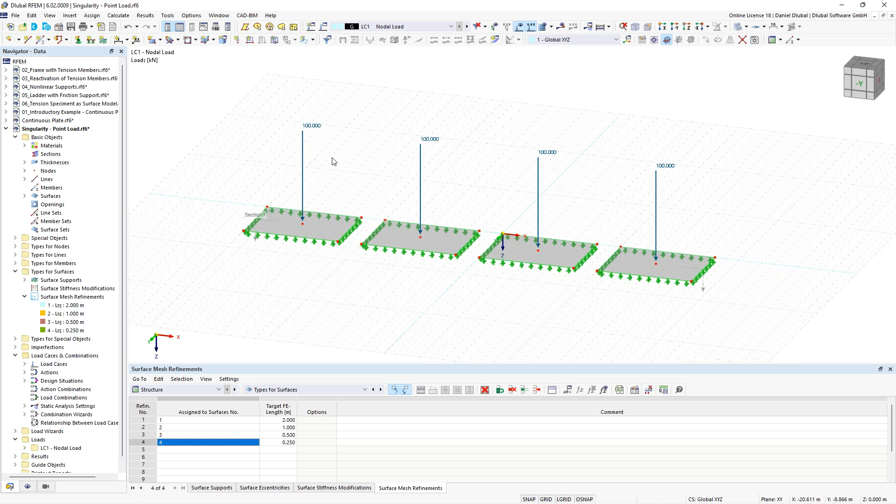And now I calculate this whole thing. Before I do that, I change here the name of this load case to single load, or let's say node load, and deactivate the self weight. Okay, so calculate it.

So now let's take a closer look to the results. First of all, I activate here the result section, local extremes. So, let's take a look to the deformation. As you can see, the deformation looks at each surface quite okay, but not the bending moments.

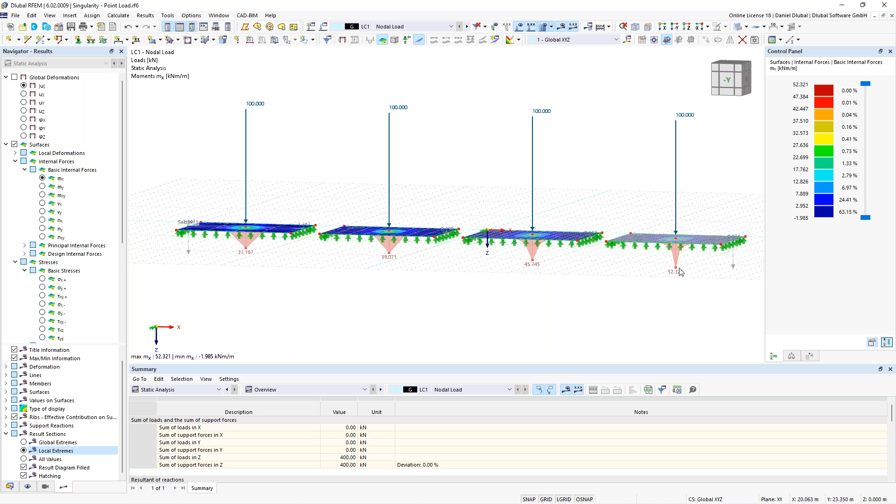So let's take a closer look. You see, on the left example I have 31 kilonewton meter as field moment, and on the right side 52. So we have different FE mesh sizes, and we know from the former example that when I have a finer FE mesh refinement, the results are mostly better than a rough one. But which example is now the right one? Because here this example is quite okay, but here I have a difference of 7 kilonewton meters, of 45 to 52.

So now I'm asking myself, which field moment is now the right one? And the easy answer to this question is no one, because this is a singularity. And at singularities, the results are not useful. So I have to see them a little bit different. I can't use these results for my further design processes or projects. So now I have to do some things. How can I work with them? So we see, this is an absolutely singular behavior.

Doesn't matter if you have a rough mesh or a fine mesh. The finer the mesh is, the higher the results get. So in the case of further mesh refinement, you can see the moment at the point load approaches infinity.

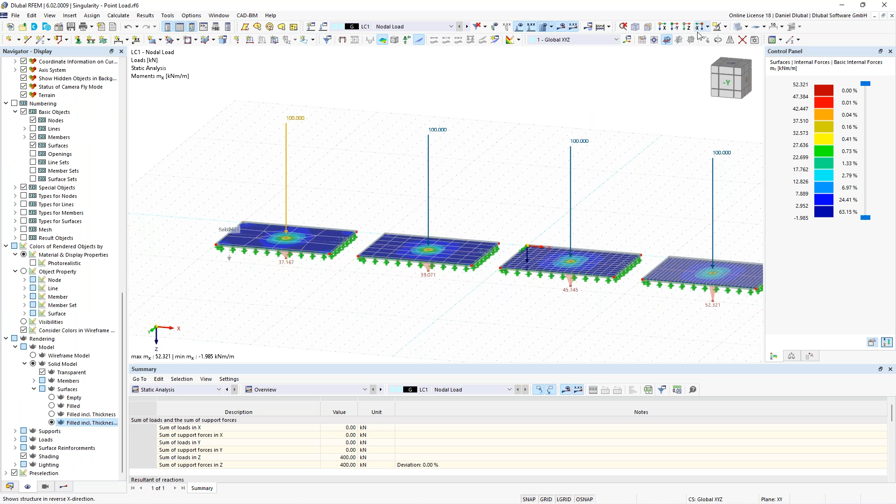Let's do this. So I take this 100 kilonewton, with a surface area of 0.5 times 0.5 meters. This depends on the thickness, so let's take a closer look. I go to the display navigator, activate the model, activate the surfaces, click filled, including thickness. So this is the thickness of your model, 200 millimeters.

Normally for concrete structures, we have a load propagation angle, or load distribution angle, and for concrete structures this is 45 degrees. So when I apply the load on the top of my surface, I can distribute it with an angle of 45 degrees until it reaches the surface axis, and this is 100 millimeters. With these things, 100 millimeters and 45 degrees, I can calculate the surface area for the distribution from a single node load to a surface load.

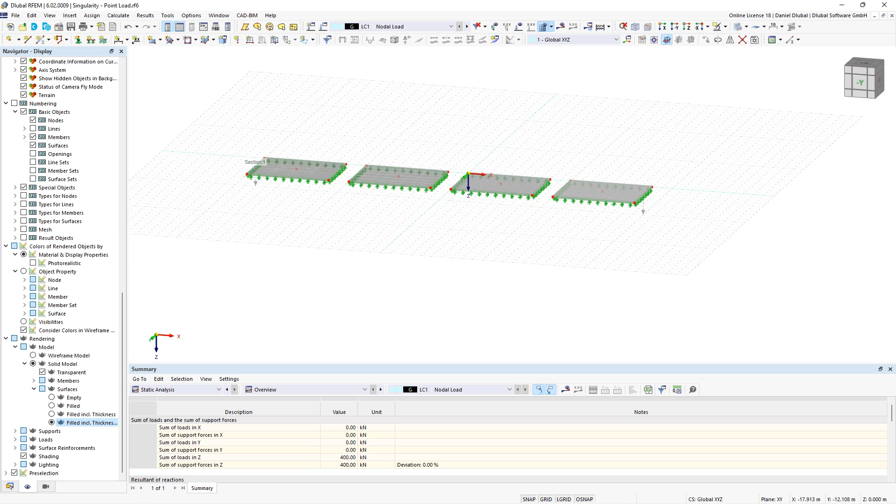I make it a little bit easier for myself, so I take a rectangular surface. In order to apply the surface load on this surface, I need to create a new free rectangular load, because we only want to consider this rectangular load on a part of the surface and not on the whole surface.

So I go to load magnitude, but before that I have to create a new load case. Now I can do this. So load magnitude in this case, let me check what I have here - 400 kilonewton per square meter.

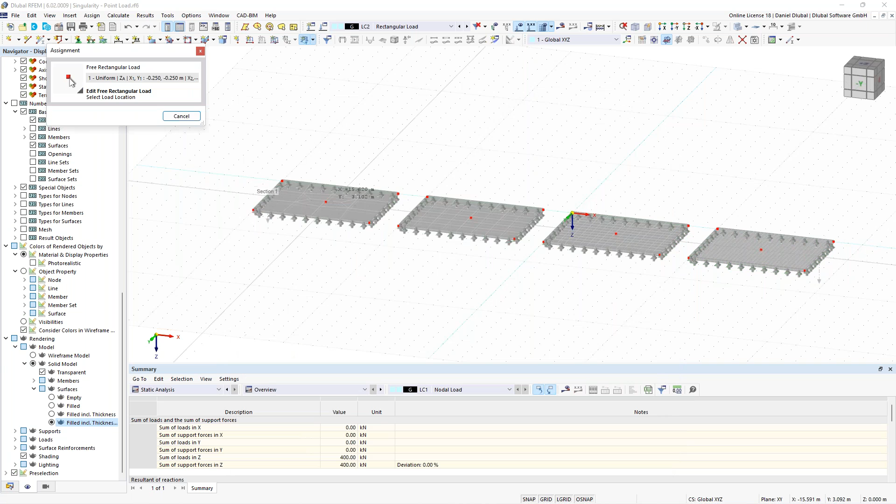And the center and size of the rectangle is 0.5 times 0.5. The center is this node, where we had our node load, and I refer to this surface. I click apply and next, and now you see this surface load, this new free rectangular load.

And I do the same for the 3 other surfaces. So again, here I choose this node, choose this one, click OK, apply and next, and do these for the other 2. And last but not least, this one again.

So now I have these loads, with the node load and the rectangular load as reference. Now let's calculate this and take a look at the field moment. What do you see? Not really a singularity, because at every mesh we have similar field moments, so similar results.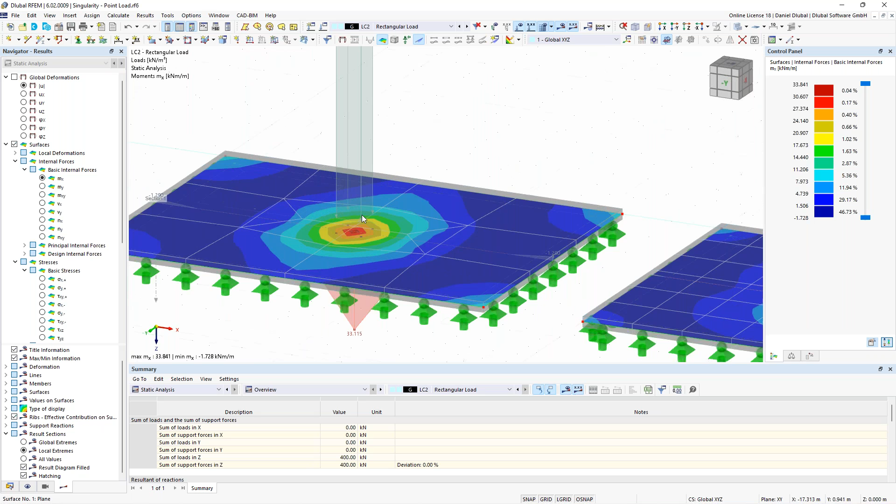So this is one approach to avoid or handle singularities. When I take a look at this one, at a single FE node, a whole load, a single load of 100 kilonewton is attacking on it. Here we distribute these things, and the distributed rectangular load is applied on several FE nodes, and this makes it by far easier for the whole FEA calculation.

Another possibility, when I take a closer look at these nodal loads, is also to have smooth areas. So right click on the section, go to result diagram again, deactivate this one, and I can choose a kind of smooth range for the result diagrams. So I say, okay, from the singularity location I want to go 0.5 meters away to the right and left side, and these results I don't want to interpret or have. I can also do this here.

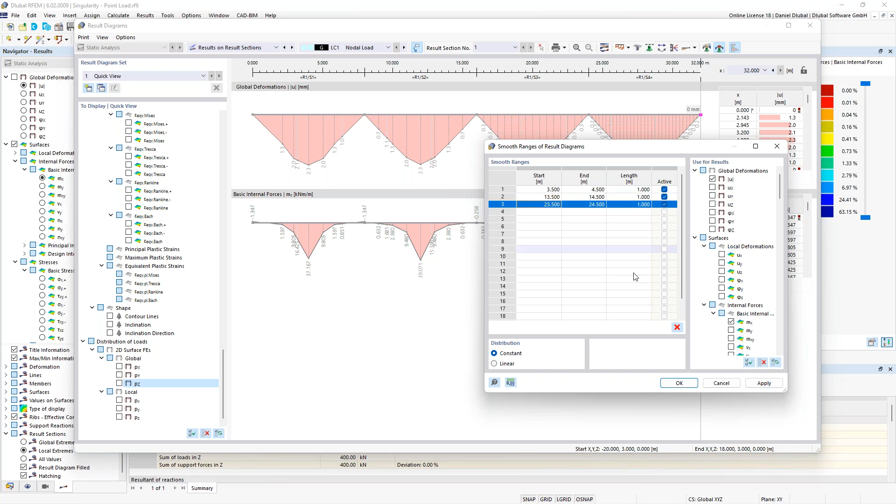I have to delete this row. I have to take a closer look at this one. This is, oh sorry, this is 12. 20. 28. Okay, now I know it.

So I want to have it here at 11.5 and 12.5, and here at 19.5, 20.5, and here at 27.5. The length is calculated automatically, and I click OK. Now you see here these smooth ranges

and also the distributed bending. So this is one approach how you can do this, and you can also move this smooth area, and then the difference and also the length is appearing here, and also the results. And this is something how you can avoid that.

Okay, so the next example will be a similar example, but in this case with nodal support. So I click here on new window or new model again, 2D XY plate, and in this case this is a singularity, nodal support. I click OK.

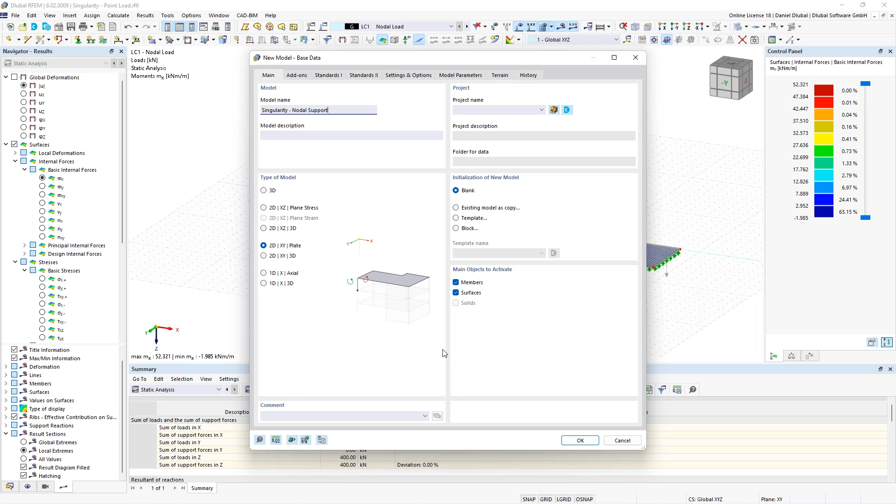And now we create again 4 surfaces, this time a little bit faster. In this case, a material of C30/37. I click OK. The thickness is 200 millimeters. I say OK. OK again. And the length of this is 8 meters in the global X direction, 4 meters downwards.

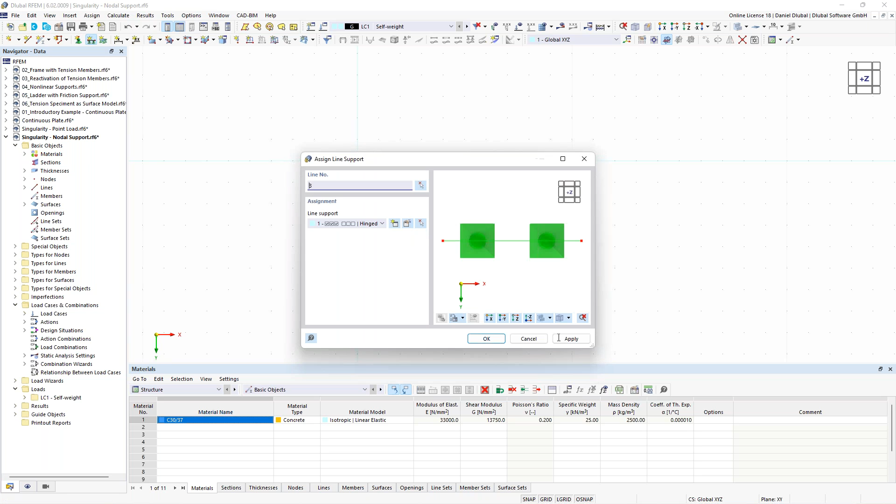And here we do something different. We add a node at the coordinate x equals 2, y equals 2. Add here a line support, and here a single support. So let's make this a little bit bigger, this 2.

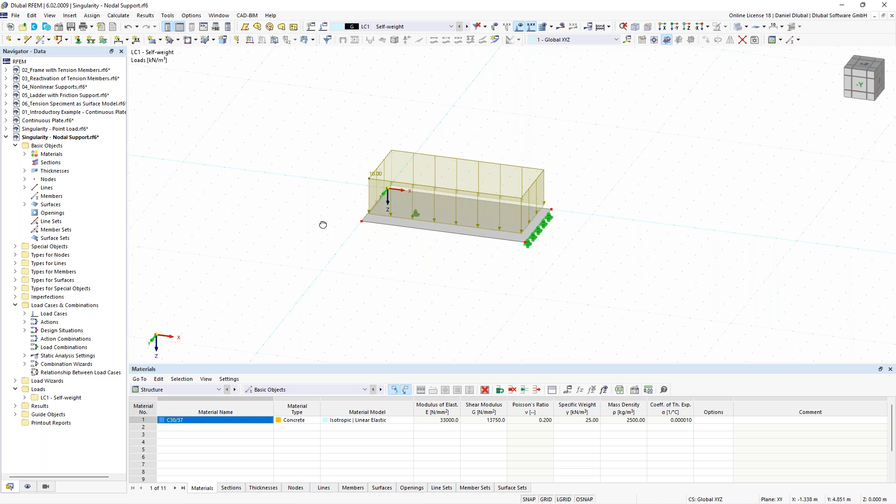Now we apply a new surface load with 10 kilonewton per square meter. I click OK, and I deactivate the self-weight in order to handle the results a little bit better. Now what I do is move this one to the left side, and then copy it 3 times

from there to there. I click OK. And now we do again FE mesh refinements. As you know, it can be done very easily by types for surfaces. Go to surface refinements, click here. 1, 2, next one is this one. So this is very fast.

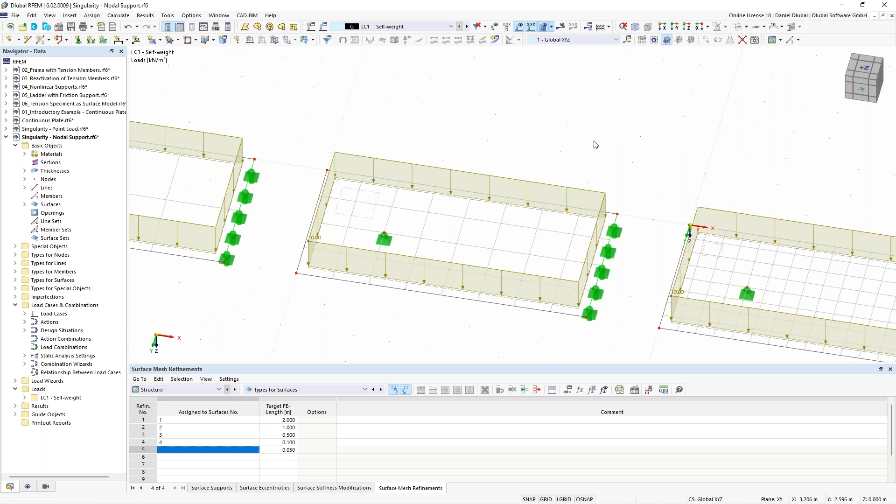Here we don't have any. So, when we take a closer look at the FE mesh, we generate it, we see it here. Sounds good, seems good. And now we do again a section result. We can do this also here at the data navigator. Go to special objects, and here you find the object or element result section.

I go to new result section and choose it from here and create it. And now let's calculate the results in order to see if we have any singularities. And as I said before, singularity locations are also nodal supports, because all the loads are on one node.

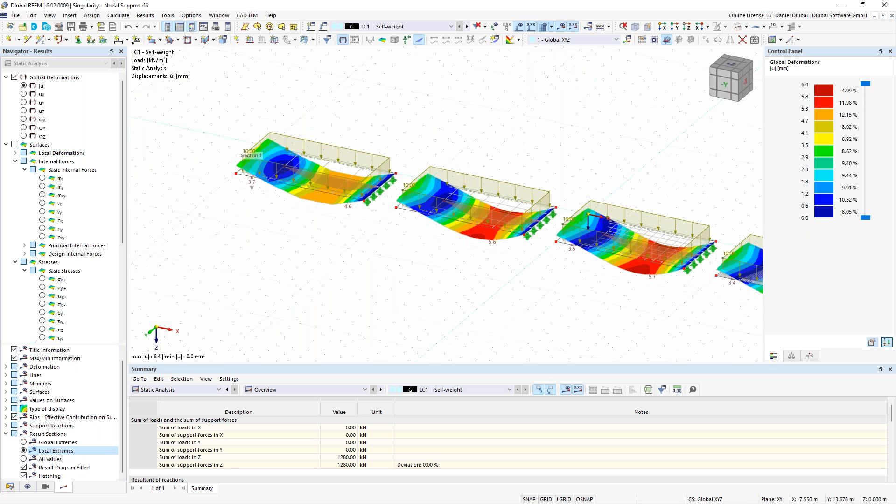So the whole material, as well as the whole surface and the whole loads, are attacking on one single nodal support, which is also part of one single FE element. So, okay, deformation seems okay, but not the bending moment in X direction.

As you can see here, really different values, especially at the finest mesh. We see here 110 kilonewton meter, 70, 80, 65. Now, what is the right one? No value is the right one, because this is a singularity. So what can I do?

Again, here I can say, okay, I can go to the result diagram and set some smooth ranges, or I can consider these nodal supports as not rigid ones, but with some stiffness. Because the theory is that the stiffer the elements, the more loads they attract and get. Therefore, rigid support conditions like this one,

like this one, are not really practical or should be handled with caution due to the likely occurrence of singularities. So we manipulate and edit now the nodal supports, giving them a kind of stiffness.

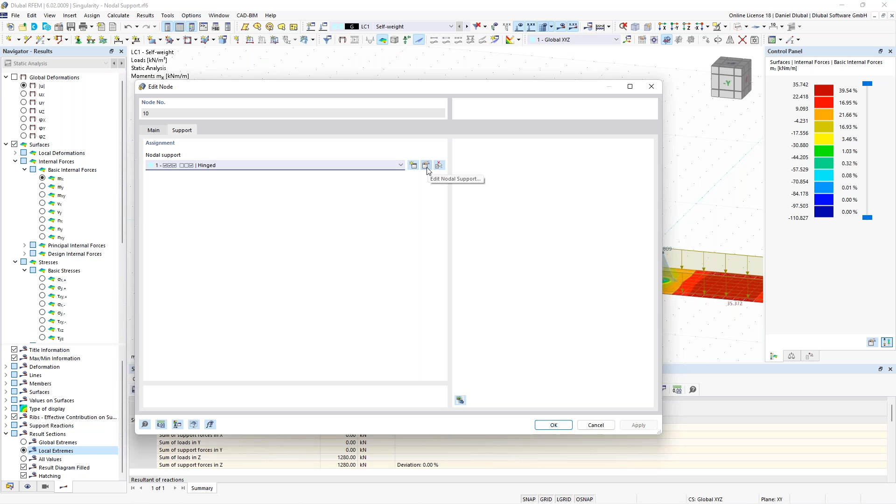And here we have the possibility to consider the stiffness via a fictitious column. So I click here, and now we can consider it like that. I can give the column a material, and say which kind of model of support I want to have. In my opinion, the first one, elastic surface foundation, will give you the best results.

And now I have to enter the dimensions of the column. In this case, it's 0.5, this also 0.5, and the column height. The lower the column height is, the higher the support spring. You can remember it as a rubber you want to press. The higher the rubber is, the easier you can press it and it bends. But the shorter the rubber is, the more difficult it is to press it. So it's the same here for the column height. In this case, I have a column height of 3 meters.

Dimensions are 0.5. And now I see here the calculated support springs. And I can also decide if I want to have it hinged, semi-rigid, or rigid at the column base. This is the reason how I consider this fictitious column. Okay, now I click OK, OK again, and now you see here these springs of the nodal support. I calculate it again.

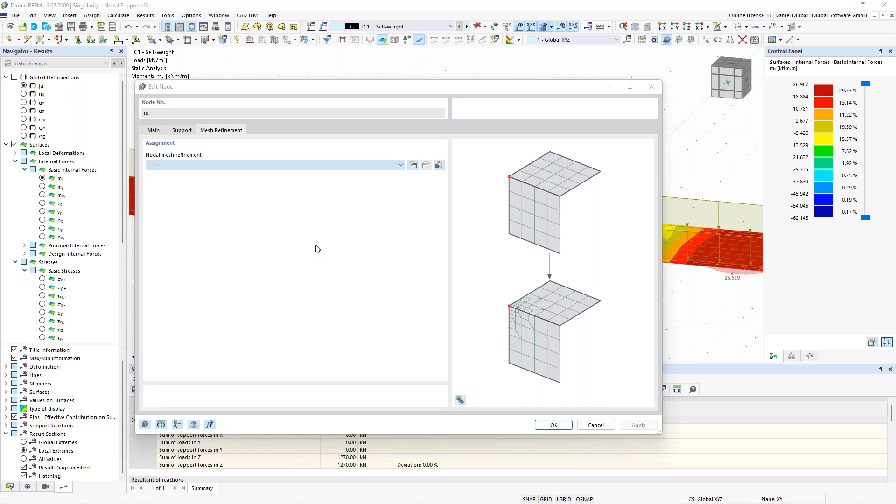One thing more is that you can also do some FE mesh refinements at the nodes. Just click on one of these nodes and say mesh refinement, and you can do a mesh refinement type, circular or rectangular. I choose here this rectangular. The side length should be 0.5, and the inner target FE length this one, and I apply it only on this surface here. I click on OK, yes.

And take a closer look at the FE mesh. Here you see this node refinement, which should make the examples more clear. I can edit it also, I can add here this one, that makes it more accurate.

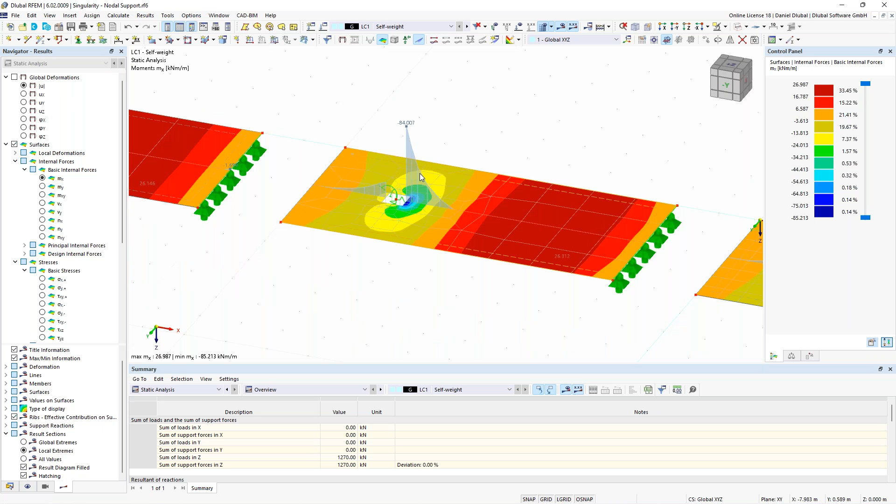Now we have here this singularity. I did an FE mesh refinement, and now it's up to you how to watch or see these singularities. When you have some singularities, you have to mark them, mark the location, and a little bit away from this extreme location where these extreme values appear, there you have to take the results for further investigations for your design. So this one exactly on the node would be wrong, but a little bit far away from that, this would be okay. And the same here, and so on.

Now I have the last poll for you because we came to the end of this training. It's also a question for multiple selection.

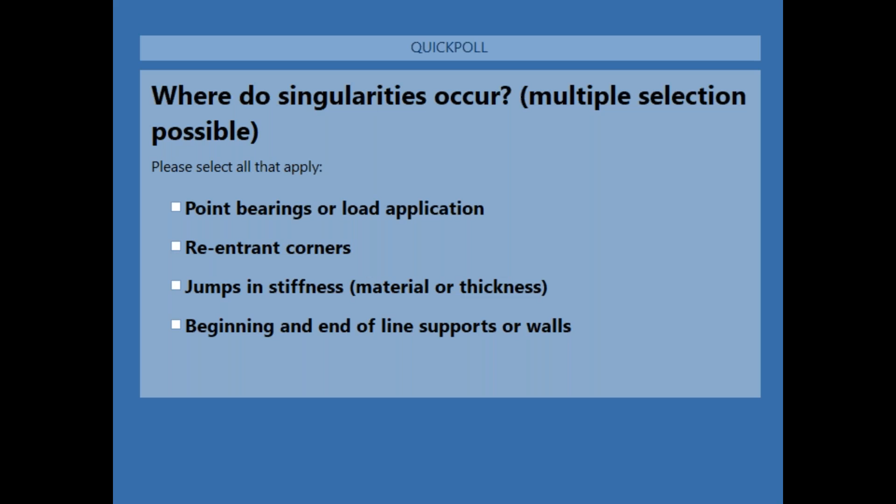So where do singularities occur? All 4 answers were correct: point bearings or load applications when you have single loads, also line loads at the end, re-entrant corners, jumps in stiffness like material or thickness, and also at the beginning and end of line support or walls.